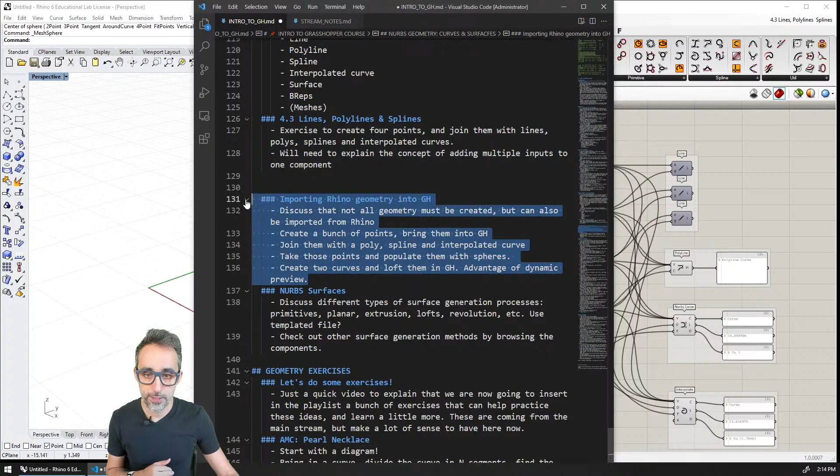So I think what could be super interesting today now is to discuss what we have on the back burner. So how to import Rhino geometry into Grasshopper. So that could be super interesting. And then how to do surfaces. I think I have a file somewhere that I may want to use just to import stuff. And I think that's what we're going to do. Is this what I want to do? Is this what we're doing? Yes.

Okay, so what we're going to do is I'm going to take this file and then I'm going to take each one of the 4 points and I'm going to import them independently. That's going to be one thing.

The other thing we're going to do is we're going to import a list of polylines and a list of points and just place a bunch of spheres on top of them. Create two curves, and then we're also going to take a couple curves and loft them, for example. That could be interesting as well.

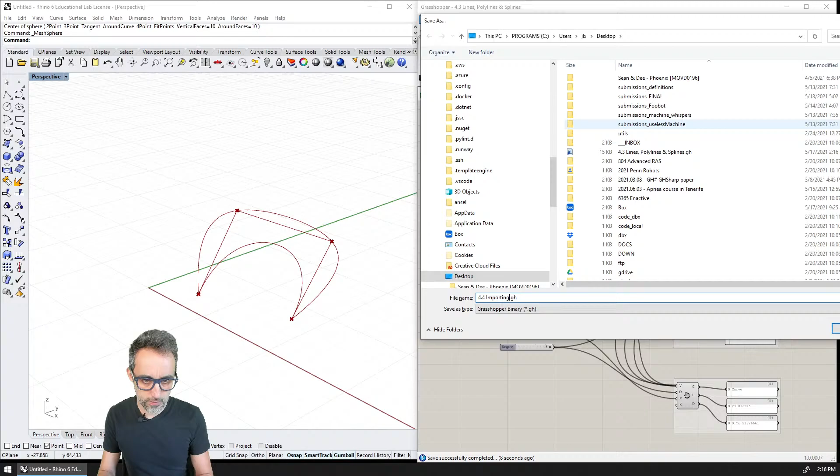Okay. All right, so let's do this. Am I ready for this? Also, I think my batteries are, you know what? I'm going to change the batteries right now because I hate it when I'm half through the stream and then the batteries die and then I have to repeat the thing and it's just not great. So I'm just going to. Can you hear me? Yes. Yoo-hoo. All right.

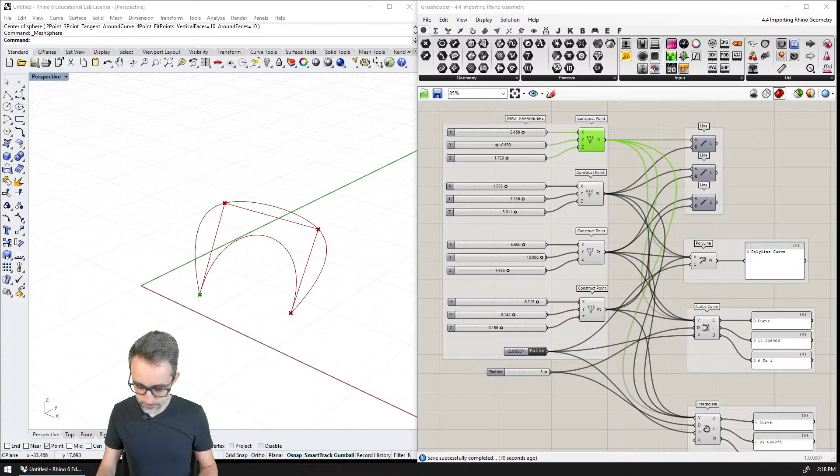Okay, so let's do this. So that's going to be 4.4. Going to be 4.5. Okay. All right.

Hi, this is Jose Luis and welcome to a new video on this series on Introduction to Parametric Modeling, where I'm going to teach you how to import geometry from the 3D modeling environment into the parametric modeling environment so that we can work with geometry as a source of information. But let me frame this, why is this important in the first place?

So in the example that we did on the previous video, we saw how we could create, for example, 4 fully parametric points in 3-dimensional space by controlling the x, y, z of each one of those points, and then create polylines, create NURBS curves or interpolated curves between those 4 points in a full parametric way, right? However, turns out that sometimes working with pure parametric information that has been generated numerically is not very convenient.

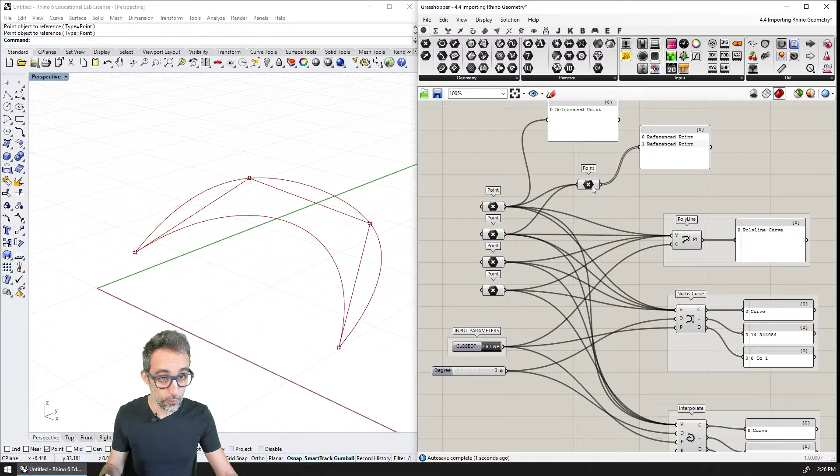So instead of manually loading, I connect this one here and I have the first point. I add the second one with shift. Now I have 2 points coming out of this component. Now I'm going to add the third one with shift. I have 3 points, and the fourth one with shift, and I have 4 points. This component is now storing a collection, 4 points inside of it. And you can notice how the continuous single line wire has changed to a double line, meaning that instead of 1 unit of data, now we have a list of data passing through this wire.

And with 4 points here, now it's much easier: I can connect this to the polyline, to the NURBS curve, and to the interpolated curve, and things are a little easier to handle. So from 4 points, I have connected to one list, and then that list is the list that I plug into my inputs for the geometry. That could be another way to go.

A third way to go could be, well, if I know that these 4 points are always going to be the same and in that order, I can just skip all of that, drop an empty box, right click and set multiple points. And then I can click in order, and the order here is very important: first one, the second one, the third one, and the fourth one. This blue line is a pre-visualization of the order.

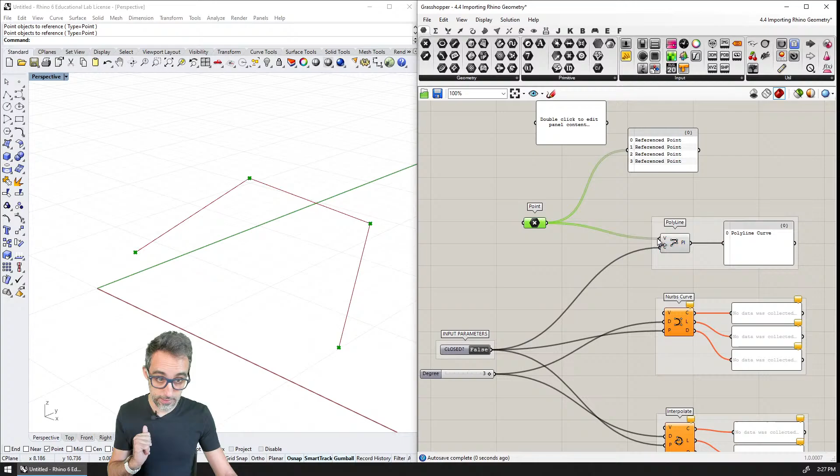And as I right click, then the 4 points are now stored in this container, and I can plug them in here, plug them in here, plug them in here. So now I have a component that contains a list of 4 reference points that are coming in from Rhino. And again, the beauty of this is that these 4 points still exist in Rhino, but they are linked dynamically to Grasshopper.

So if I modify any of the points in Rhino, that point will be modified here on the list, and then those changes will broadcast to how I generate the curves inside of Grasshopper. Okay, so this is a really good way if you want to create a modeling environment that allows you some hand manipulation, but at the same time has all this parametric logic in the back end, or if you just have to work with data that somebody has given you on a CAD file.

All right, so let's take a look at other examples of things that we can do by bringing in data as inputs into a Grasshopper definition. Oops, let me save this file. It's going to be 4.4. Okay, and then I'm going to move here.

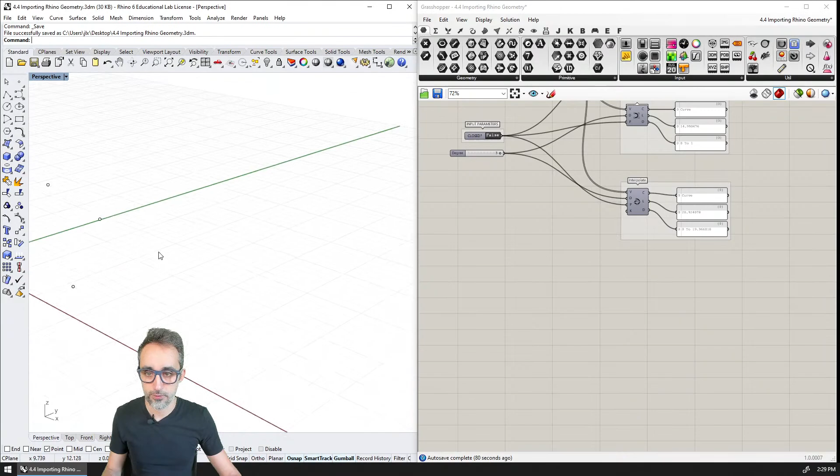Hey Josh, how you doing?

All right, so I'm going to create a bunch of points here. I have turned off pre-visualization here, and I have moved away a little bit from where I was, and I'm just going to create a bunch of points, like a few of them. So for example, several, I don't know, 10 of them.

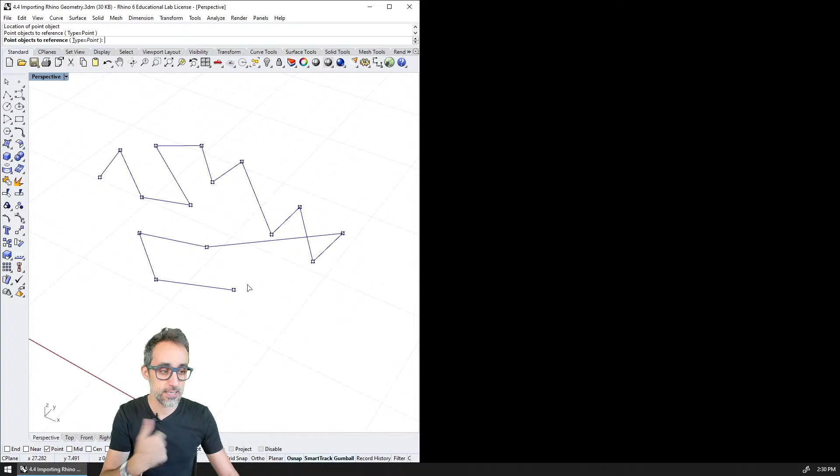I'm just clicking right click and left click, and I create a bunch of them, and then I can create an empty point component parameter, right click, set multiple points, and just select all of these. What you can see is due to the nature of how I have selected them, they turn out to be ordered in this sequence inside of Grasshopper. But now I have here a list of 16 different points. Now with this, I can do whatever I want.

I can, for example, create a polyline between them, and then it creates that object there. I can create a NURBS curve from all of these points, and then it creates this kind of fun squiggly line between them. That's kind of cool, right? I like this, actually. Or I can create an interpolated curve.

This is a very common operation because very often we want to go through the points. So I'm going to create an interpolated curve. I'm going to turn off the other one and this other one. And you can see we also get a fun kind of interpolated curve. And again, if I modify any of the input points, everything adapts accordingly.

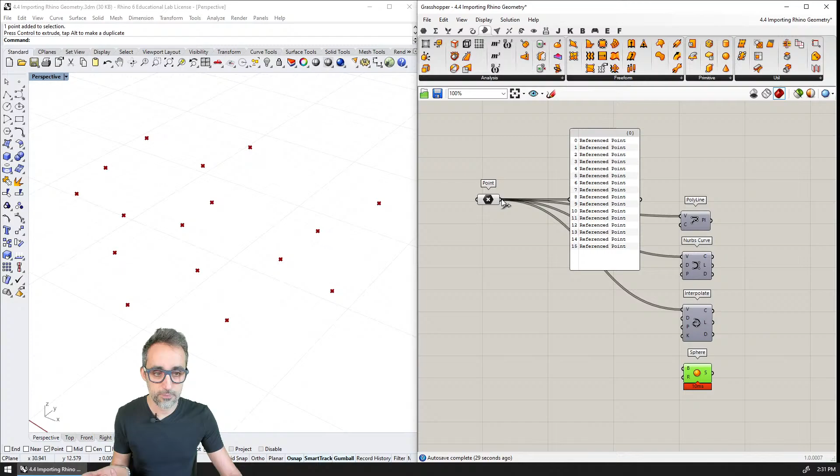Or something that I can also do is use these points as centers for primitive surfaces. So for example, if I go to surface, primitives, sphere, and I place a sphere here, if I plug the point into the center of the sphere, you can see that each one of the spheres is now centered around each one of the points.

Because the sphere, when it's given a list of data, just applies the same operation to all the elements on that list. Further down in this list of tutorials, I will teach you how Grasshopper works with data and how we can manipulate streams of data. So that's

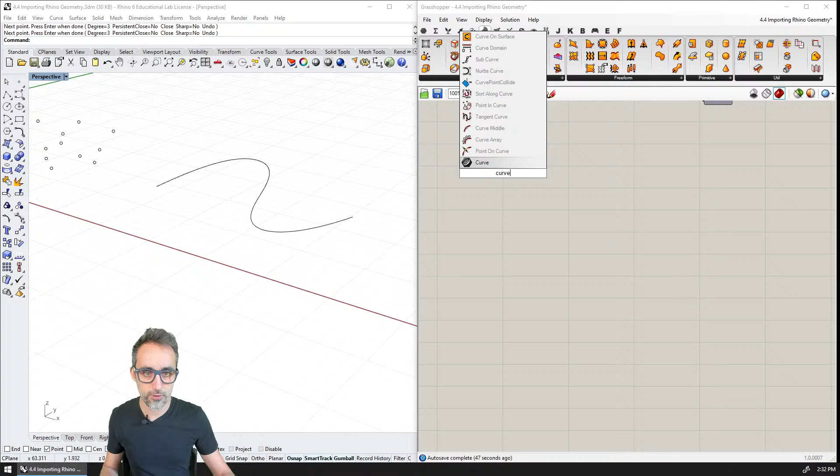another point. Or, if we are tired of points and want to do something different, we can use curves as inputs. So for example, I'm going to create this curve right here. And then I'm going to move over here, double click and type curve, which, because of the hexagon icon, is an empty parameter component that can contain curves.

If I right click here, set one curve and click it, now this curve has been referenced in my Grasshopper definition. I have a referenced planar curve. And I can create another one here, which I can move a little bit in the Z direction. I'm going to bring that one in as well: curve, right click, set one curve. So now that I have these two curves, I can, for example, generate a surface that is a loft between these two curves.

So for example, I can go to Surfaces, Freeform, and I can find a Loft component. This creates a lofted surface through a set of section curves, of curve components.

So for example, now I can plug my first one here, and then if I plug the second one with the shift so that it adds in both, you can see that I have a surface that is lofted between the two curves. And if I now change any of the curves, for example if I move it, the surface adapts. Or if I change any of the control points, for example drag that around, the surface adapts to those changes. You see?

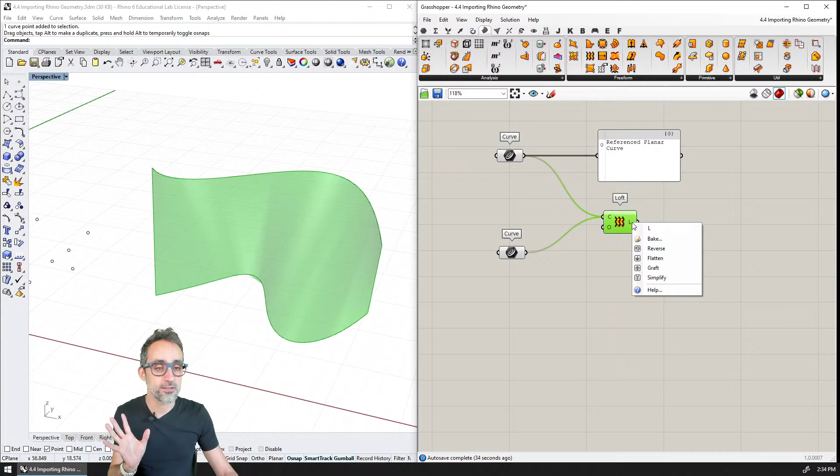And as soon as I get, by playing around with the two curves, the exact right surface that I like, with the smooth surface, whatever, I can just right click, bake the object, and then I will have a copy, a static copy of that surface that I can now send to other programs for rendering, for 3D printing, or whatever.

And remember, as per our previous videos, if I still choose the curve and I move it around, the curve has lost the relation, the surface has lost the relation, the one in Grasshopper has lost the relation to the one in Rhino, because the Rhino one is just an imprint, it's like a footprint, a stamp of when that surface was baked. Okay?

Wonderful. So this is bringing data into Grasshopper as an input. We will do that a lot in the examples that we're going to see very soon. At this point, I think we know enough so that we can work on a few examples just to practice things out.

See you on the next video where we're going to do some practice exercises to get stronger on everything that we have learned so far.

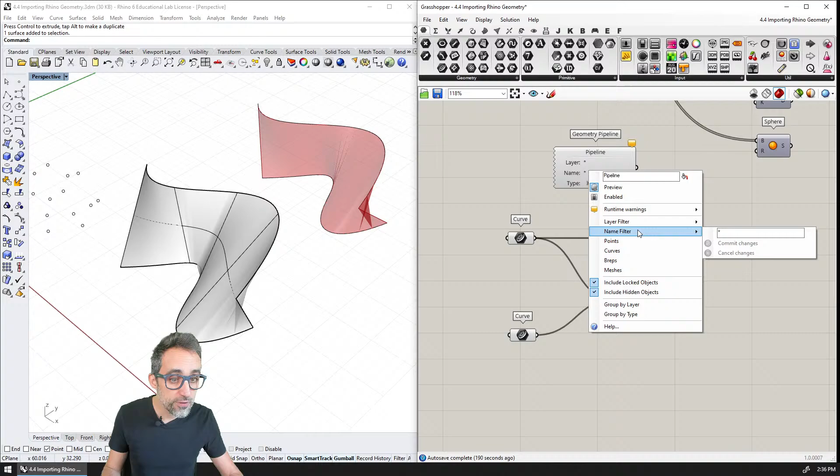So what is, oh, Pipeline, I barely use that component. What is Pipeline? Geometry Pipeline. Oh, I have never used that. Defines a geometry pipeline, Rhino name, layer filter, name filter, include hidden objects. Okay, all right, this is cool. I've actually never used that component, I think. No.

Where are we going now? Okay, ooh, all right, so I actually already did some examples. Oh look, we're live! Yoo-hoo! Okay, so we did some examples, playlists, algorithmic modeling challenges. Yes, we did the pearl necklace.

So actually, my idea was to insert the algorithmic modeling examples, but I wonder if we should just do... I wonder if... So my idea was, we have the playlist, and I'm open to suggestions here. I think we have a playlist. The playlist is... So in the playlist we have blah blah blah, and we're learning blah blah, and I just wanted to insert here as exercises. I wanted to insert the algorithmic modeling challenges, and I wanted to create... So I wanted to have... Yeah, I don't think that's gonna work because these are a little...

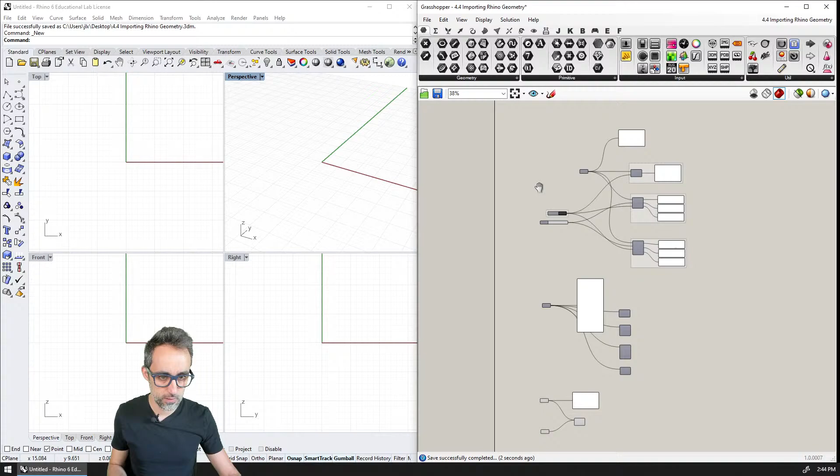Yeah, let's do that. So I'm just going to save this. I'm going to create a new one. And then I'm going to save this with that component and close it up.

All right, we don't need to show an image of that. People can understand that, I don't think we need to show an image of that.

And then for this one, am I going to start the exercises by the end? So am I going to start by showing the end of what we're doing, or am I going to start... wow, this is more difficult than I thought.

Okay, so I'm going to record a quick video, a computational design live stream. I may want to do one that, did I do one that was a backdrop for intro to parametric modeling? Do I have that? Oh my God. Sorry, I should have prepared this a little better. Oh yeah, I do have one, that is Introduction to Parametric Modeling. Okay, no? Hi, yes, okay, so I'm going to use that backdrop then.

Here, welcome to learn, blah blah blah. And then I'm going to just here. Oh God. Okay, no, that's not the one. Okay, so I'm just going to, okay, and then another one. This is going to be what? Image. Nope. And then I'm going to name it. Okay. So, okay.

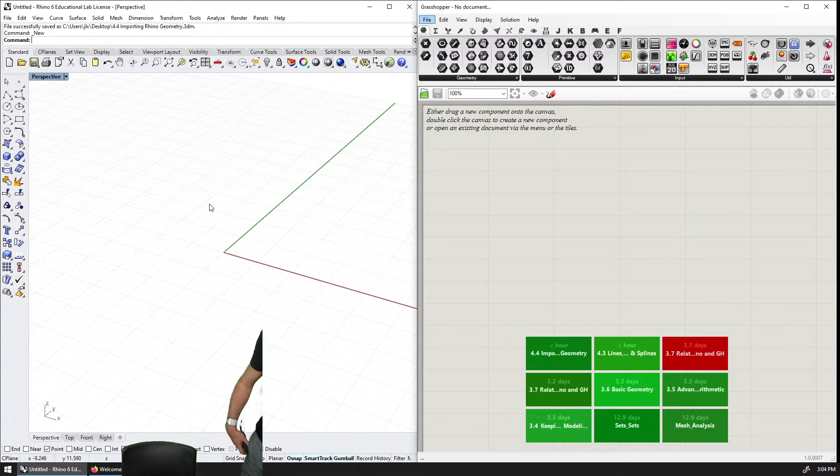So let's go back here. And the sun is starting to hit. Wait, let me close the window. Let me close the window, and then I'm actually going to open the other one, because it's kind of warm in here. All right. How's the lighting? You can still see me, correct? What if I turn this on? No, I don't like that. This is a bit more natural. All right.

Back in Grasshopper, this is going to be a piece of cake. So you'll see, first of all, we want to have the curve, the curve that is going to be the thread. We could generate that parametrically.

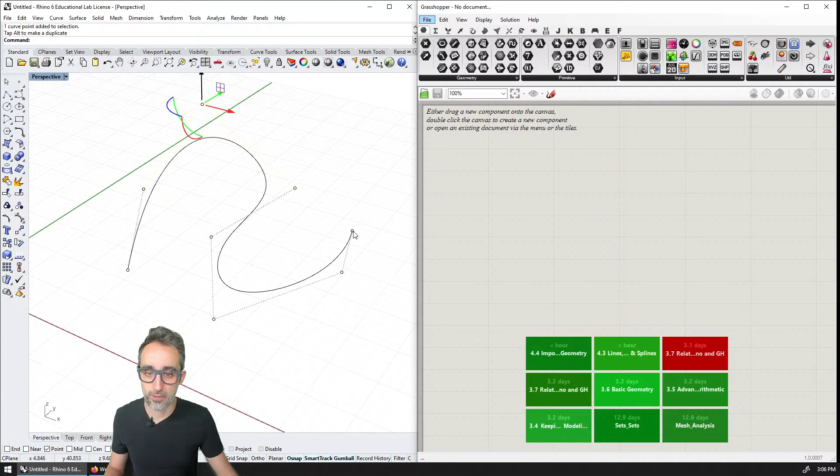But as I said in previous videos, for some things it's actually much nicer to have the tangibility, to be able to touch and move things around in Rhino, rather than moving sliders. So I'm actually going to just draw a curve here in Rhino. This is going to be the curve I'll use as an input for my definition, and I'm going to make it 3D, giving it some volume here and here, so it's not entirely planar.

I have the one curve, okay, so that's one of my inputs. The other input is going to be the number of pearls. For that, I'm just going to use a slider that I'll right click and edit. I'm going to make sure it's an integer, because I don't want 2.3 pearls—that doesn't really make sense, so no decimal part. The minimum is going to be 2, because I don't want less than 2 pearls, and the maximum can be whatever, 1,000. It doesn't really matter, okay?

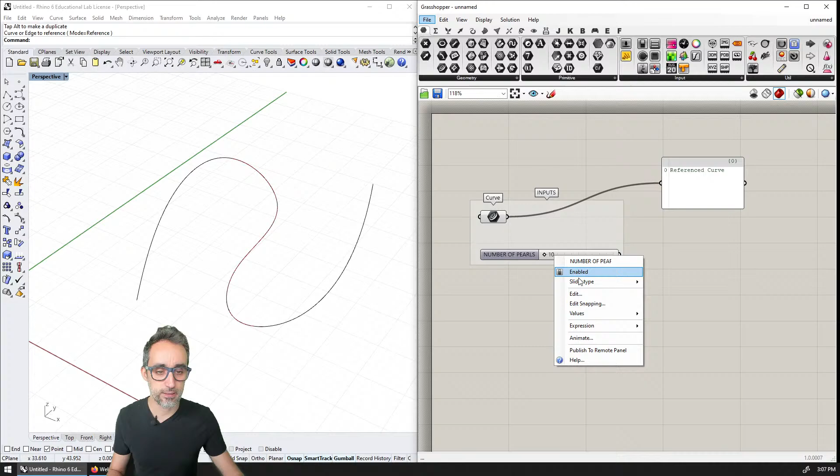And then I'm just going to crank this up, for example, to the value of 10. So this is going to be the number of pearls, for example. And you know how I like to have all my inputs grouped here on the left hand side. This is called inputs. Okay, and then have everything cleared. I'm going to just keep 100 here so that it's a bit easier to move this around. Okay, wonderful. So what is the next thing that I need to do?

First, as I showed in my diagram, I need to subdivide my curve in an amount of points which is equal to how many pearls I have. So in order to do that, how do I subdivide a curve? Well, this is something you're going to have to start doing on your own, which is going through the library of components, reading through components and finding the ones that might help you do certain operations. So if I want to subdivide a curve into points, I wonder if components to do this would be either in the curves family or in the points family.

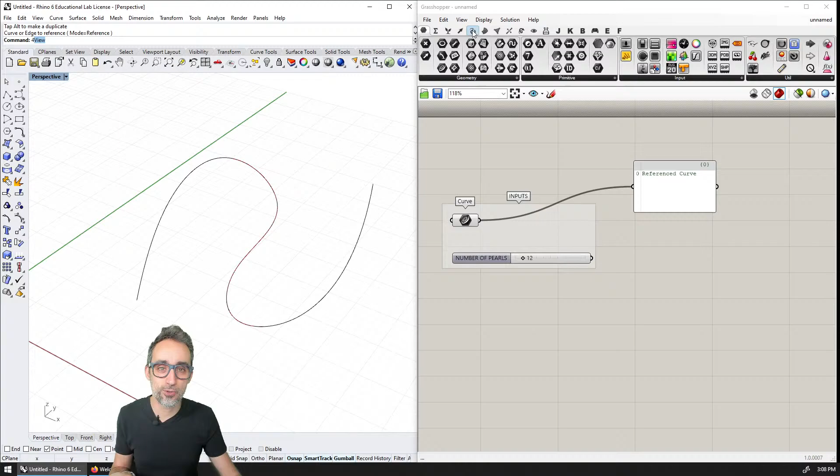I probably want to go to the curves family, and you can see that there's a whole category called divisions here that gives you many options to do different divisions for curves. And if I say divide curve into equal length segments, I think this is one that is probably going to give us good results. As usual, the first thing that we do whenever we drop a new component that we have never seen before is take a look at the inputs and the outputs.

The input is the curve that I want to divide, how many segments I'm going to be dividing in, and whether I want to split at the kinks or not. I'm not sure what that means, but I can still try it. And then this is going to be the division points. This is going to be the tangent vectors at the division points, which I don't think I'm going to be using, but it's okay to have. And T is going to be the parameter values at the division points.

Remember when we spoke about NURBS geometry, we spoke about the parameter being that relative position that we can situate ourselves along curves inside of the domain of the curve. So T is going to be that value for each one of these points. So I'm just going to plug in here the curve, and I'm going to plug in here the number of pearls. Actually, if you read carefully, it says here the number of segments that I want to divide, and here I am saying the number of pearls.

So if I actually crank this down to 2 segments, you see that I actually get 3 points. It's not exact, okay? It's not perfect. So this should be more like number of segments, but it just doesn't really make sense. So we could actually say, well, maybe to be more precise, if I want 3 pearls, what I need is to divide in 2 segments. So what I will need to do, and I'm going to use an expression here, is take whatever you give me minus 1.

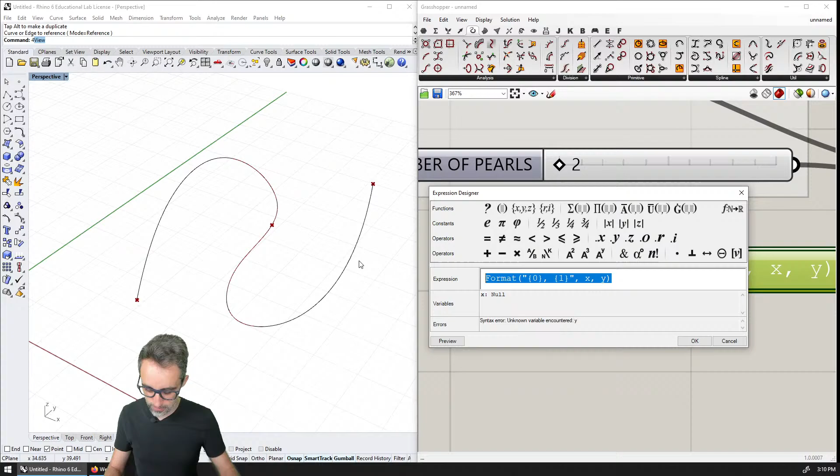Remember that I just happen to like expressions better for computation, you see? And now this is going to be much, much cleaner. Remember to always read the expression carefully. This is number of segments, not the number of pearls. So now I have number of pearls is going to be 10, and now I have exactly 10 pearls here.

And then the only thing that I need to do now is place on top of these spheres, which I can find under surfaces, primitives, spheres. I can place spheres on the points, and let me see the points here. Yes, so all the points from the divide curve, you can see that I have a collection of 10 points, which are also the ones that I can see if I click here, I can see the 10 points.

If I use those 10 points as the centers for the spheres, you can see that now I have the pearls, right? And I can increase more or less, and I can have more or less pearls on my necklace, which is kind of nice, right? However, the problem is that the radius for these pearls is always 1, because that's the default in the component.

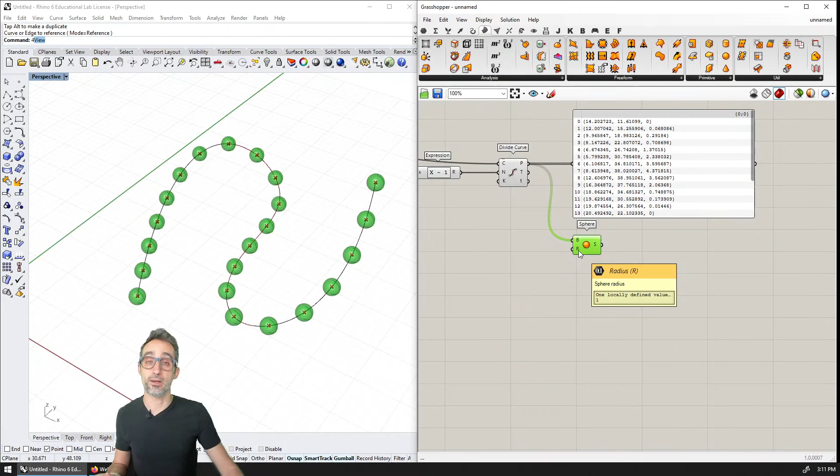So, as we saw before on our diagram, it turns out that in order to make this happen correctly, what we need to do is calculate the diameter of each one of the pearls dynamically. We need to calculate it parametrically using data in our definition. So how do we do that? So I'm going to create another expression. You know how I like expressions better than normal operators. And what we're going to do here is I'm going to say n is going to be the number of pearls.

So if I now create an expression component, let me do that again. I'm going to create an expression component, and this is going to be the length of the curve, and this is going to be the number of pearls. All right? So now the diameter is going to be L divided by N. And I need to plug in here the number of pearls, so that's going to be N.

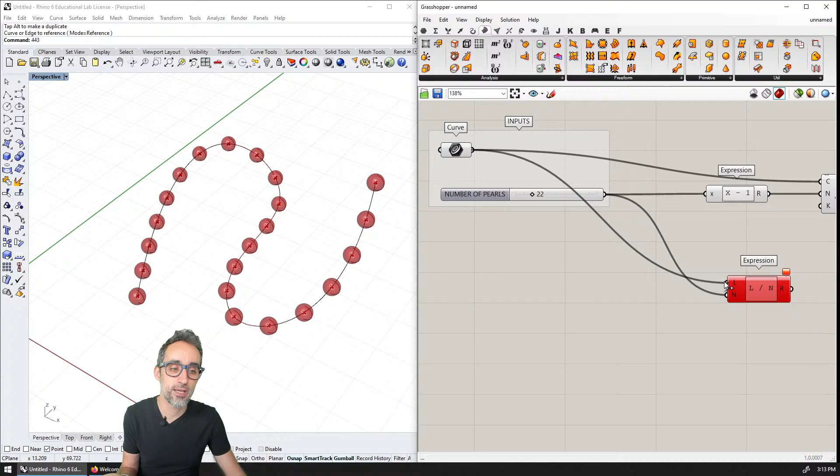And you might feel inclined to connect the curve here. But that is not going to work, right? Because you cannot plug a curve into L, which is expecting a number to work with. The expression component cannot automatically decide that if you give it a curve, what you're actually meaning is the length of that curve. So what you need to do first is, using some kind of calculation, figure out the length of that curve. Thankfully, Grasshopper gives us components that can do that very easily.

So for example, if I go to curve, you can see there is a full tab called analysis that can give us a lot of information about curves in general. One of them here is the length of a curve. So it literally takes a curve and it measures the length. If I place that here, the input is the curve you want to measure, and L is the length of that curve as a number. So I can just plug that in here.

Let me use a panel to make sure that this is working well. Yes, the length is 89 units of whatever. And then here, I'm just going to place that under L. Now, it turns out that each one of these is 4 units in diameter. So if I plug this in here, you can see that now we're getting close, but not quite. What is going on? If I go to the top view, you can see that most of the spheres are actually overlapping with the center of the other spheres.

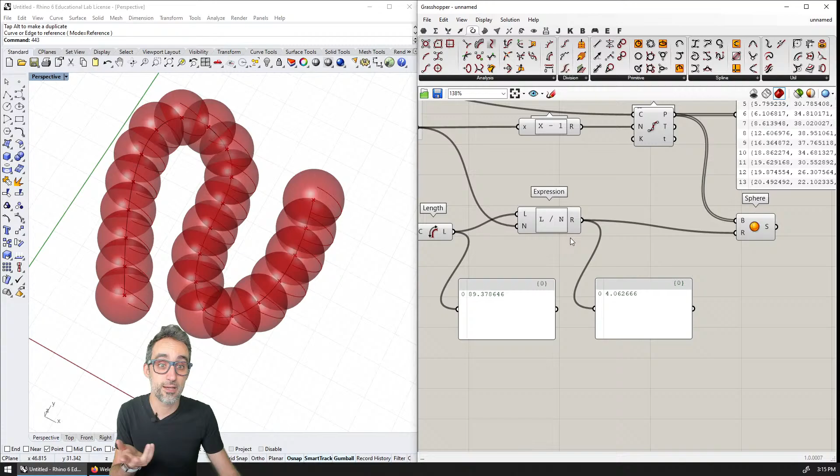You see that? That is because what I have calculated here is the diameter, but what the sphere component is asking me for is the radius. So it's very important, as I said before, to always read the inputs carefully so that we know what to do. So how can we calculate the radius then? Well, the radius is just half the diameter, right? So I can change the expression and say I want to divide length by 2 times N, or whatever the result of this was, I just multiply it by 0.5. Both of them work well, okay?

And if I do that, now you can see that the pearls are fitting well with each other. And look at this, this is the nicest thing. If I increase the number, you can see how the diameter is slowly decreasing because they're parametrically related, and everything adjusts accordingly. And if I move one of the points of the curve and stretch the curve a lot, you see how all the pearls just increase in size to adapt to the new geometry.

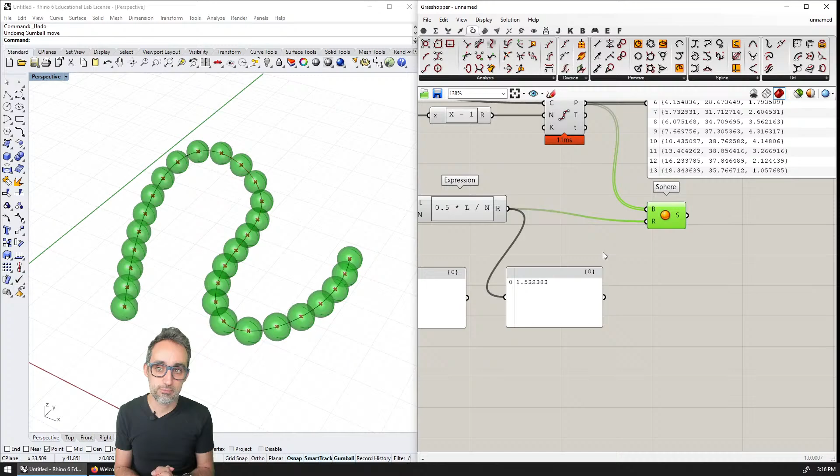Okay? So literally, this is the magic of parametric modeling. Just by making sure that we have the right information and that everything is parametrically related to each other, we can create complex relationships of modeling form between different geometry types.

Now, a quick footnote to this exercise. I have taken many shortcuts here, because if you look carefully, you cannot really calculate the diameter of the pearls just by subdividing the length. Sometimes you're going to get this situation where the curvature is very pronounced and the pearls are overlapping, whereas when it's not, you're going to have a gap between them. And similarly here, you have some overlaps, and here you have some gaps. This is because the process that we have followed does not really take into consideration perfect tangency, okay?

And that in order to do that, we would have to use other components here, like for example, divide distance, and follow a different logic. So this was just for the sake of oversimplifying the process. But if you actually want to see how this works, we have an algorithmic modeling challenge on pearl necklaces, which is somewhere here. This one. If you're actually interested in that, make sure you check our algorithmic modeling challenge 3.1, 3.2, where we improve that and we make things perfectly tangent.

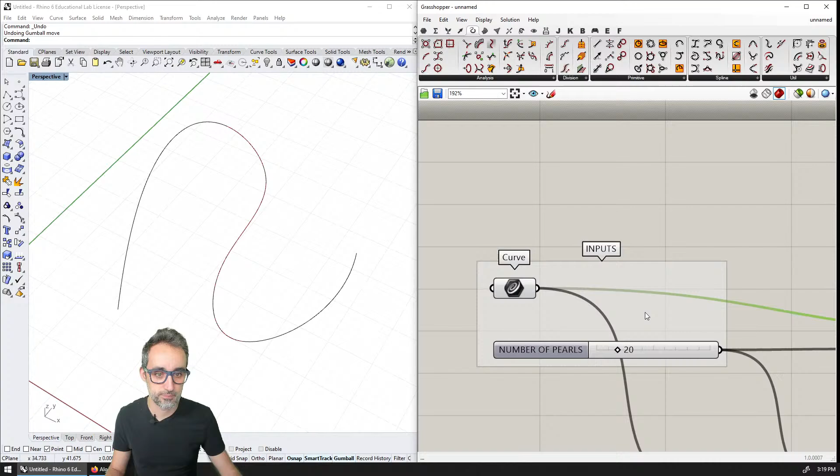All right. I need to record the introduction. And this is going to be exercise 1, pearl necklace. Okay. And it's going to be E1, yes.

Hello, this is Jose Luis, and welcome to this new video where I'm going to teach you how to model a parametric. Starting over again.

Hi, this is Jose Luis, and welcome to this new video where I'm going to teach you how to model a parametric pearl necklace. And what does that mean? It means that starting off from the shape of some curve and then adding as one of the parameters the amount of pearls in a necklace, we're going to create a definition that is going to generate and populate an amount of pearls equal to whatever number we choose parametrically on top of that geometry.

This could be used for visualization, it could be used for jewelry design, it could be used for many things. But the idea is that we're going to learn how to model geometry that is bound numerically to each other based on the relationships of the elements in this modeling environment.

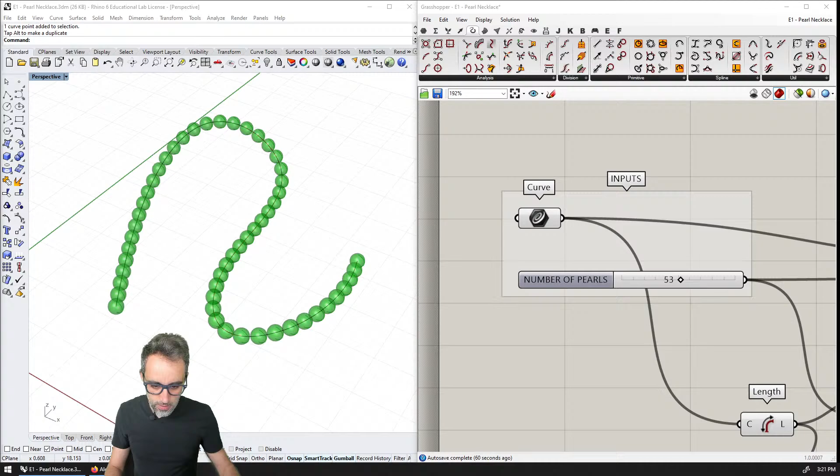All right. Okay, so we're done with this one. Woohoo! All right, we're going to save that. I'm going to save this without that. And we can probably keep that. And I'm just going to group this here. And there you go.

All right, what is the next thing we are going to do? We're going to model a drinking glass. So, yes, so as we had it here, third point. Okay. To the coordinates.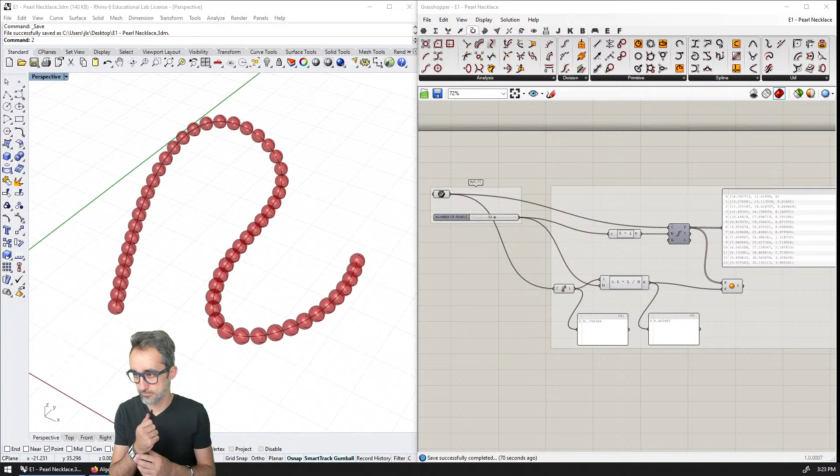Okay, we're going to look at a drinking glass. Yes. Okie dokie. So we're going to start a new exercise. And then here. Okay, so the second one is going to be a drinking glass. And then here we're going to save this. And then we're going to start a new one. Okay. Where is my pen? What am I going to draw here? So I'm going to start by doing the drinking glass.

Let's get busy. So as I said before in my previous video, the best way to start any parametric modeling exercise or work is to break down the problem into the steps that we think we're going to pursue in order to complete the exercise, and also think about what are the inputs that we're going to be using and what is the relationship between them.

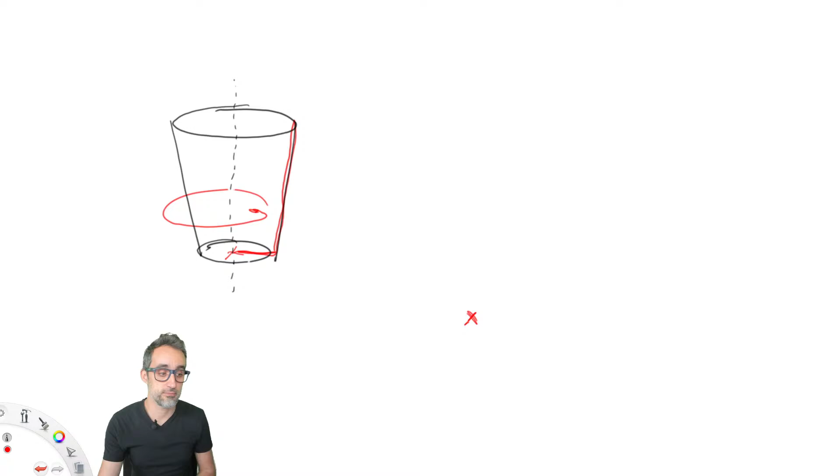Then something that I will want to also have control over might be the radius of the base. So I may want to have control of this distance, and therefore there might be another point here, and this is going to be the radius of the base. I'm going to call this capital R, the radius. And then this could have some kind of other point here, a third point, all right? And then this point could be the point that closes the polyline that becomes the curve that I want to revolve. And then there would be an axis here that I would do the revolution over.

My question here would be, what parameters am I going to use to control where this point is in 3D space? You could argue, well, maybe I can use this radius here. But I would argue that perhaps that is not very intuitive, because if I have, let's say, one slider for the radius on the bottom and another slider for the radius on the top, then maybe what would happen is that as I increase this radius, I would start getting a shape something like this, which would basically kind of break the inclination that I have already achieved in my glass. So from a design perspective, I don't think I would want to do that.

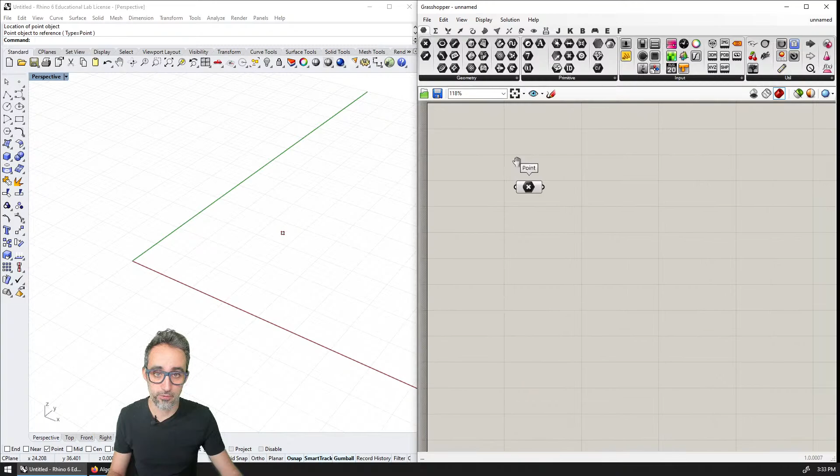So I'm going to add a new parameter that is going to be a slider, and I'm going to call this capital R. And remember, as per our diagram, that's going to be the radius of the base of the glass. So this is going to be a slider that is going to go from 0 to, for example, 10 units. And I'm going to set this at the value of 1 right now. So that's going to be one parameter.

Then the next parameter that I'm going to throw in is going to be another slider. And that slider is going to be lowercase b, which is going to be the horizontal offset from this point to this point, how far they are away horizontally. Okay, the way I'm going to do that is I'm just going to right click here and say b, and then I'm going to edit this, and I'm going to say, well, this is going to be from -5

because it could go inwards. Maybe we want to design a glass that can bend inwards, but if we don't, we can actually cap that possibility by just saying that the minimum of this slider is going to be 0. And then the maximum is going to be +5, for example. And I'm going to leave it at the value of 0.25. That's good with me. And then I'm going to just copy paste this one and say that this slider now is going to be h, the height of the glass, from 0 to 10, just like the previous slider.

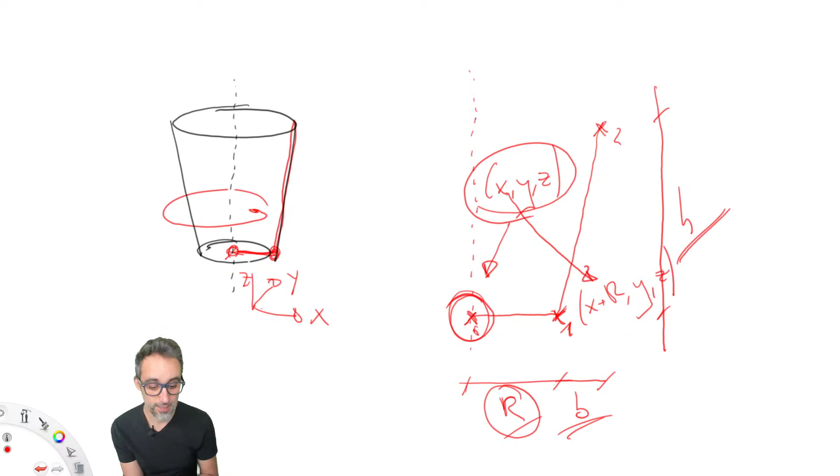So in order to find point number 1, the only thing that I need to do is figure out these coordinates and create a new point where the X coordinate has the radius added to it. So let's just do that. So I have the point that has been referenced here, and I can't really read the coordinates here, but it has whatever X, Y, Z coordinates. How can I read those coordinates, the X, Y, Z, and then add some number R to the X?

Well, it's actually quite easy. So if I go to the vector tab, and if I go to point, you can see that we have used the construct point.

Given 3 numbers, I can create a point object. But there's also the exact inverse component: given a point, give me the 3 numbers that define its coordinates. So I'm going to place this deconstruct, take a point here, and now I can see the X value, the Y value, and the Z value.

So point number 1 is just going to be as easy as adding to the X coordinate the radius. I'm going to create a new point whose X coordinate is the X coordinate of the previous one plus the radius, the Y coordinate is going to be the same, and the Z coordinate is going to be the same. You see what's happening here? Now, no matter where I move the original point, the second point follows parametrically. If I increase the radius, you can see the other point is always bound. So this is going to be point 1.

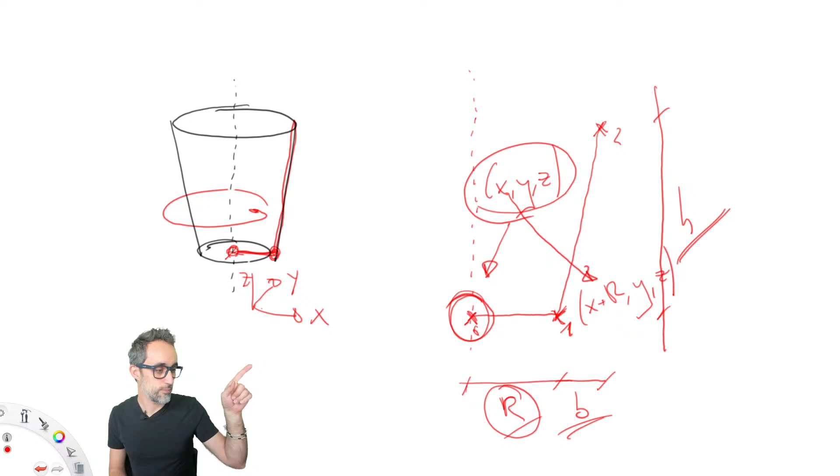Now the thing I need to do is find point number 2, the one on top. If I think about it, the X coordinate of this point is going to be whatever the X coordinate of point number 1 is, plus B, because it's whatever these coordinates are plus this distance. The Y coordinate is going to be the same as Y1, because remember, there's no depth here, it's not going anywhere deep. But the Z coordinate is going to be whatever the Z coordinate of point 1 was plus the height, this value here.

So the only thing we need to do now is break down those relationships, take the coordinates of point 1, and use those to generate point number 2. I have point 1 here, so I could deconstruct this point again into X, Y, Z and operate with it, or I could, to be more optimal, just fetch them directly from here, since I know this is the coordinate of X1, and these are the coordinates of Y1 and Z1. But for the sake of visuals, I'm just going to do this — it's not the most optimal, I'm doing extra operations, but it's fine.

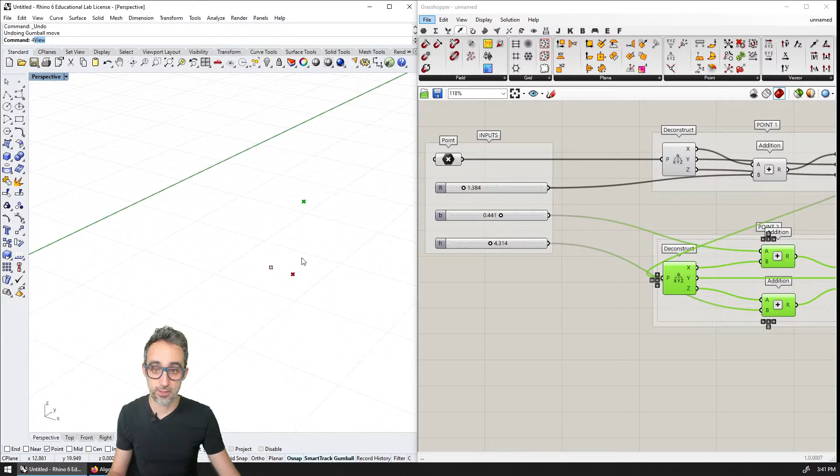I can increase the radius a lot, and you can see how the whole wall moves accordingly. I can do negative and positive, and I can increase the height a lot too. Let's make this a little bigger — this is going to be the height, and this is going to be the radius. Now I have the three points: first point, second point, and third point.

Can I join those with a polyline? Let's do that. I'm going to type polyline, add the first point, the second point with shift, and the third point with shift. And now I've created the wall for my drinking glass. I'm going to give it a little bit more of an inclination. Okie dokie.

So we have now the wall. Now the only thing that we need to do is create a vertical axis, and we need to revolve this curve around that axis to generate a surface of revolution. How can we do that?

If we go here to the surface tab, and if we go to freeform, you can see that somewhere... Revolution. We can create a surface of revolution. Let's drop this and see what parameters it needs.

I'm going to need a profile curve. I'm going to need a revolution axis, and you can see that the icon tells me that it has to be a line. Then this is asking me the domain of the revolution, so from 0 to 2 pi by default. 2 pi in radians is 360 degrees. Okie dokie, let's take that.

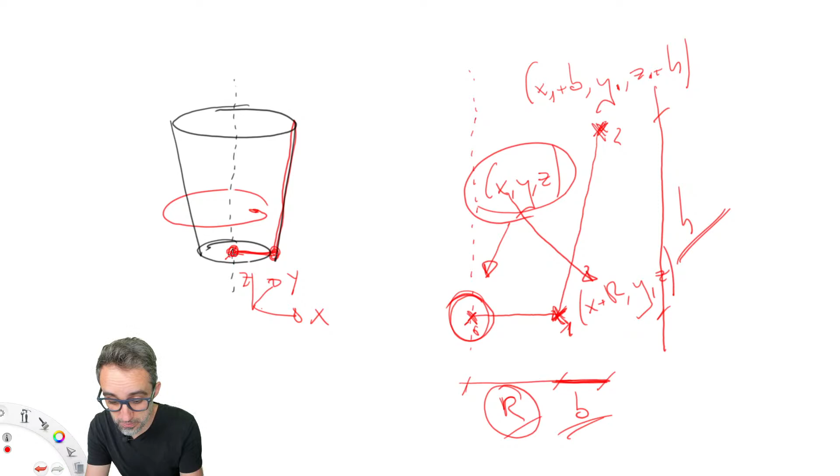Well, I can just generate a line that is going to be this point, and between that point and another point that is any distance on top of it. It doesn't really matter. So what I'm going to do is take this component, take this point, and deconstruct it here to the z-axis, the z-coordinate.

I'm just going to add some random number, so I'm going to create a panel and use 1 as a unit. This is not even going to be a slider, because I don't want the user to think this is something they should adjust. So I'm going to take the original point, deconstruct it into coordinates, and add to the z height 1 unit, then construct another point based on the same x, the same y, but a z coordinate that is a little higher.

And then what I'm going to do is create a line object between the second point I generated and the first point, the original one. So now you can see that I have this line that is a vertical axis, and no matter where I move my point, all the other points are parametrically linked to it, which is kind of nice. So I'm going to use this line as the revolution axis, and ta-da!

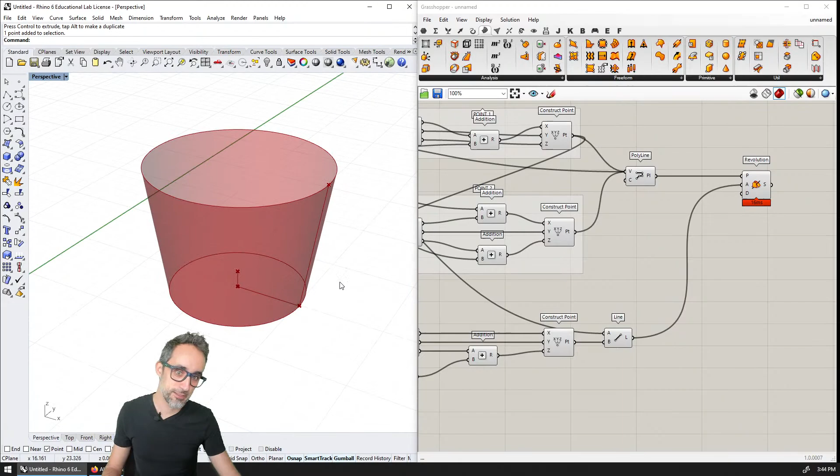Woohoo! What do we have here? Oh my god, it looks like a drinking glass, but I don't like the proportions here. Wait, let me make this a little more and a little more slender. I kind of like this. What about this? This is looking kind of nice. Do I like this? I don't know.

Let me see, I'm going to bake this so that I can see a little better. And I'm going to choose ghosted so that I can see. Let me try another one.

So I'm going to move the point here, bake it, and make a version of this that is going to be a little wider, perhaps a little more ample, and a little thinner. I'm going to bake that one, take a look at it, and then I'm just going to copy another one.

And now maybe this could be a plate instead, if I just make it very, very shallow. Interesting, so it could be a glass, but it could also be a plate. I'm just going to bake this, and boom.

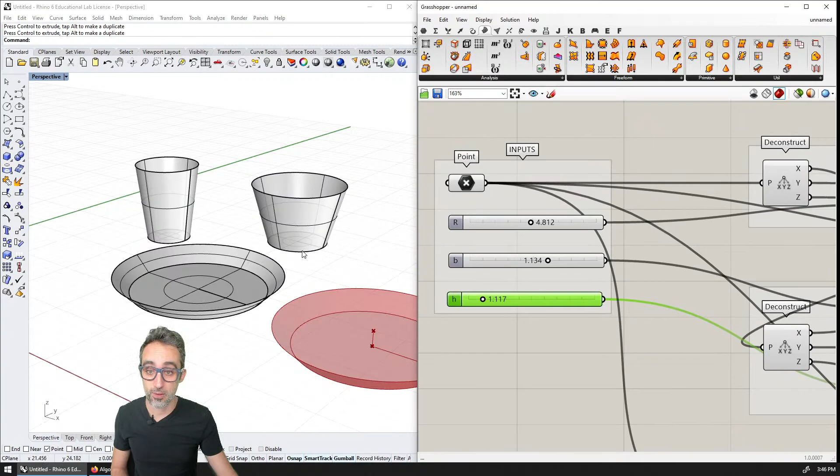And this that you're seeing here is what's very nice about parametric modeling: the idea that by creating the tree of relationships that define a particular family of forms, then by modifying the input parameters, like where the center of the glass is, and some numbers that define its height, width, etc., I can explore the family of possibilities this gives me in a parametric way. So in this exercise, we have seen how to generate something that looks like a drinking glass, or maybe actually even a plate, okay?

And one thing I would like to note is that when I created this point and this line, since it was kind of temporary geometry that I needed just for the process, but wasn't really meaningful in my definition, maybe something I want to do is just hide it.

I'm pressing Ctrl Q to disable the visualization so it doesn't obstruct what I'm seeing in the process. That's something to think of to keep your definition cleaner. You could also choose to just delete everything else, all the points, all the polylines, and keep it super simple. I don't know, up to you.

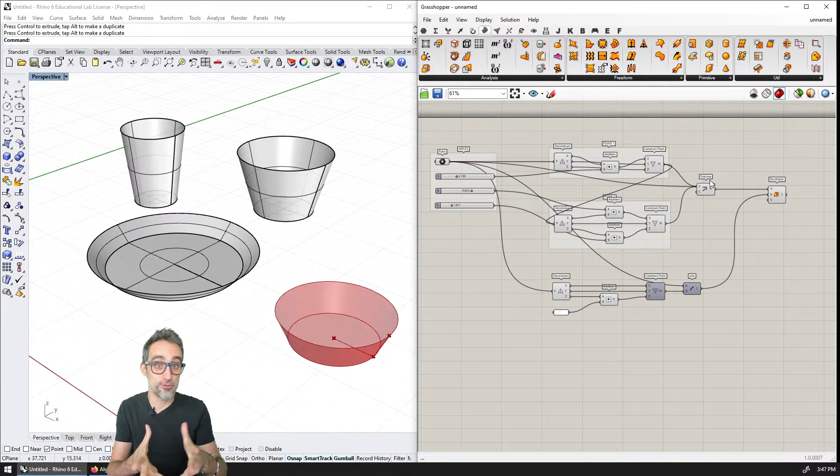That was a good exercise, and now you can use your glass generating algorithmic definition to generate a whole variety of these elements, bake them, render them, 3D print them, or whatever you want. Let's take a look at more exercises.

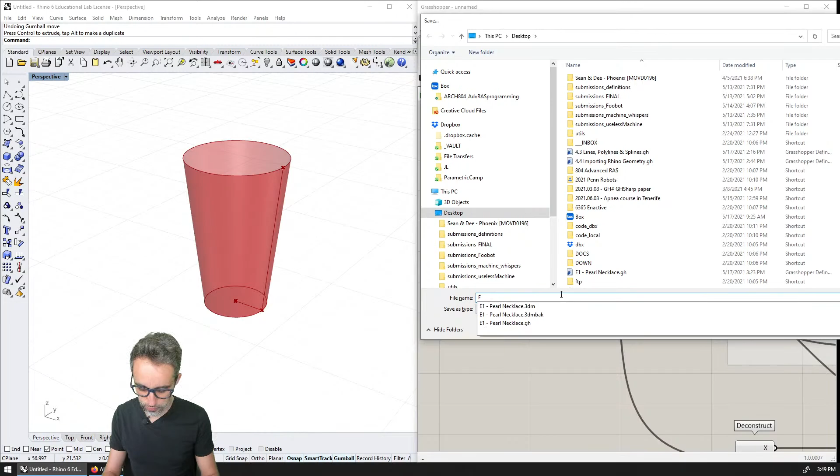And what is it going to be called? Exercise 2, glass.

Hi, this is Jose Luis, and welcome to a new exercise in this series of Introduction to Parametric Modeling, where I'm going to teach you how to model a very simple drinking glass. The beauty of this is that it's fully parametric, so we'll be able to choose, for example, the point where the center is going to be, but also a few other parameters, such as the radius of the base, how tall or short the glass is going to be, and the inclination of this glass.

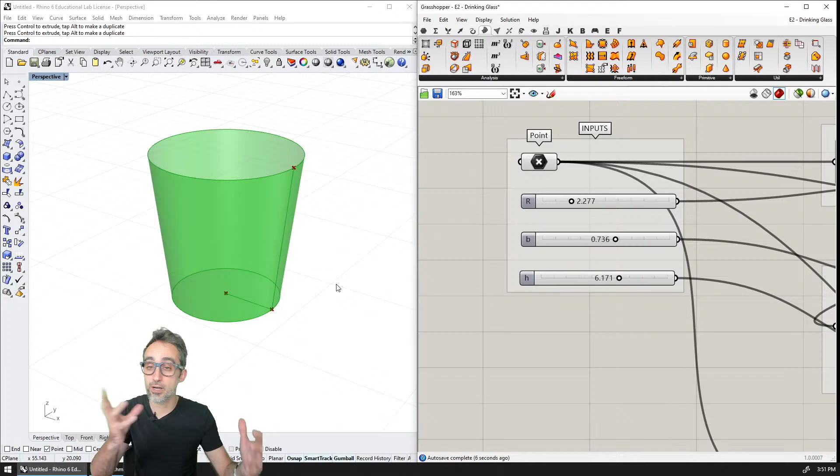By doing this, we'll be able to explore all the variability of different forms so we can generate different versions, bake them, and send them for rendering, for fabrication, for production, whatever you want. This is going to be a super simple exercise. We're going to learn the basics of numerical relationships between point coordinates. It's going to be super interesting. Let's get busy, let's get doing it, let's get hands on.

Okie dokie, all right, so that is great. Then I'm going to group this and say revolution axis, and this is going to be the surface.

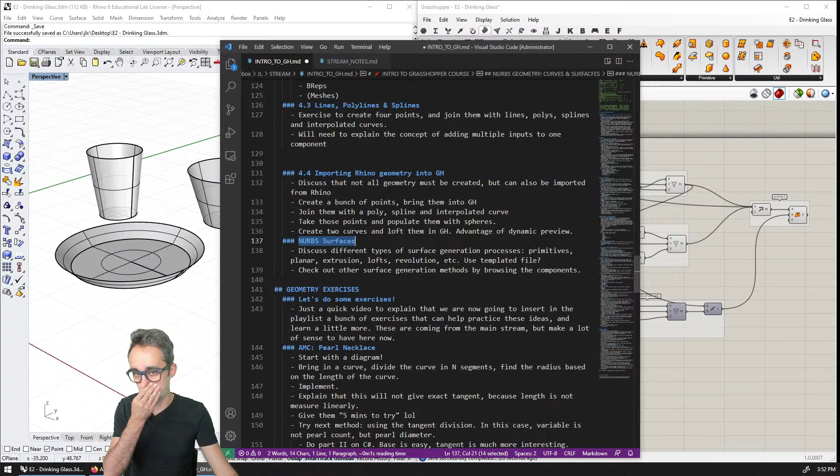Okie dokie, so we have that. Do I need to save this? I probably don't. Well, for the point, I may want to have the point there. Fine, I'll save it. All right, I forgot to record NURBS surfaces, so I need to go back and do this one before we go into flower base, which I think that's where I'm going to stop today.

Yes, because chess pawn, I don't think I'm going to do it since it's similar to the same ones before. But I want to do the chessboard, and attraction and repulsion, and the hanging cloth. So that's going to be nice. Okie dokie, and I need to do that before 5 because I have meetings at 5, 6, and 7.

Oof. Oi, how's everyone holding on? Nylan.

Well, I mean, it's a matter of choices. Again, when it comes to design and parameters, we all have our different opinions, and there's no right or wrong. So it's up to you. It's absolutely up to you.

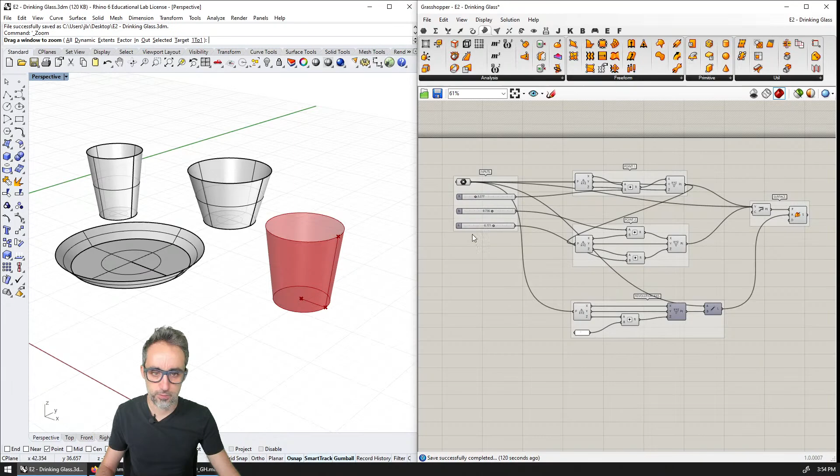Okay. All right, so, okie dokie. Surfaces, let's take a look. So I'm going to save everything beforehand. I'm going to save this, I'm going to close here. I'm going to save this and close. And I'm going to save this and close.

And surfaces, I think for this one I don't want to explain everything, I'm just going to... oops.

Oh, where are... I did have a file somewhere with a bunch of different surfaces. Where did I have this? I don't want to... Sorry, I'm looking through my files, seeing if I can just pull up an example of different surfaces. And I cannot. Where are those files? Where are those files?

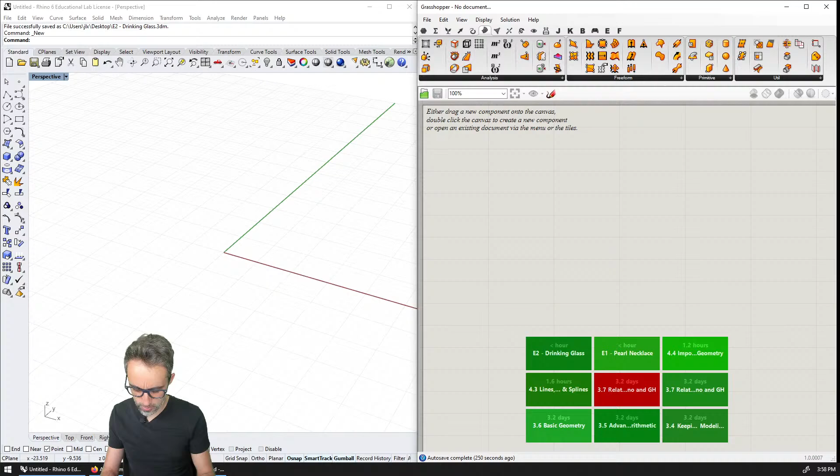Okay. So it's going to be 7. Okay. So that's going to be here. That's going to be what? That's going to be 4.5. NURBS surfaces. And that's going to be this one here. And that's going to be this one.

Okay. Then color. And then, okay, and then ruled surface. And that's going to be here, and that's going to be a set. Okay.

And have I shown how to do surfaces before? Yes, we did it with the lofting on the exercise previously. One way.

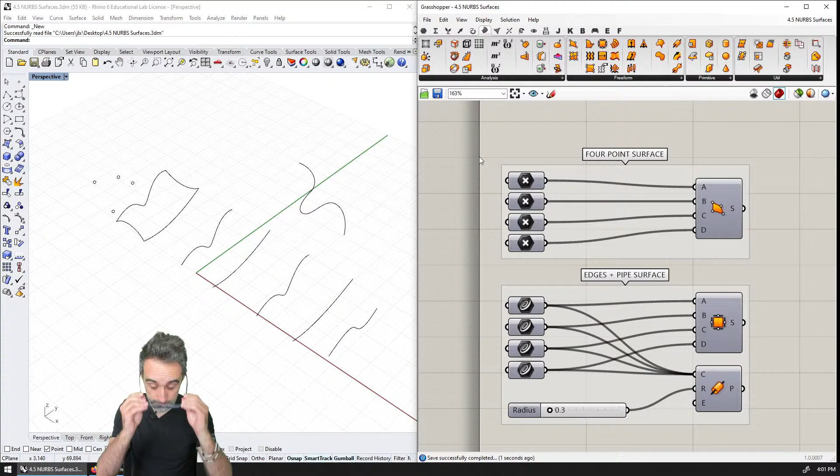Okay, I'm very dense today. I can't talk much more. All right, I'm going to record the tutorials and then I'm just going to call it a day. Is it a day for a run? Should I go out for a run? I think it's really, really nice weather out there. Might be a good day for a long run, actually. Okay.

Hi, this is Jose Luis, and before we go into hands-on trying things out, I also wanted to do a quick round of review on the different ways we have for modeling surfaces in general. And this applies to NURBS surfaces, but it also applies to other kinds of surfaces. The idea is that, as I explained before, NURBS surfaces are driven by control points, but only in very niche cases do we actually generate these surfaces by designing the control points one at a time.

Typically what we do is, in order to generate these surfaces, we start off from other parameters or we use simple curves and we follow other processes to generate this form. So, for example, I'm going to run you by a bunch of these examples. And at this point, what I would like you to think is that you might just want to give it a chance to browse through the library of components that are available in Grasshopper, for example, or in Rhino, and take a look at these components and their descriptions to see if you can actually figure out what they do. Because if you are familiar in general with 3D modeling, you might find that many of these operations are actually quite familiar to you.

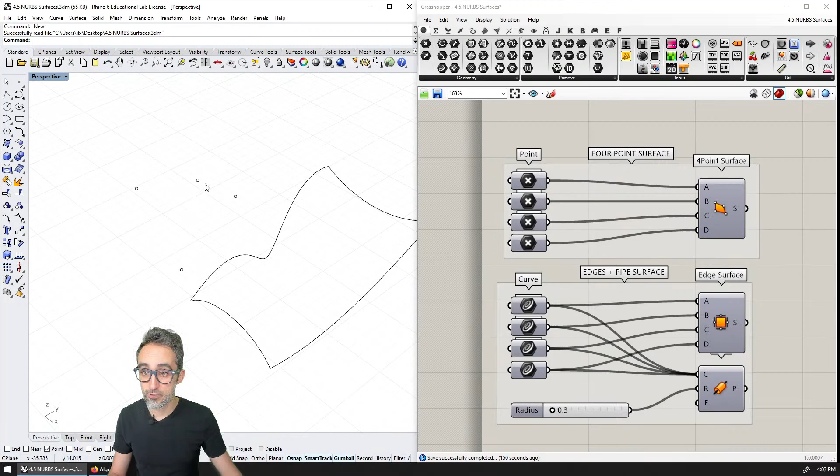So for example, we can create a 4-point surface by inputting the 4 corners of that surface. So if I take these 4 points and I feed them into a 4-point surface, we can see that we get, as a result, this kind of hyperbolic paraboloid kind of situation.

However, if instead I take 4 boundary curves with any particular shape, and then I create an edge surface, what you will see is that Rhino will try to fit a surface to the boundary of the 4 curves that we have defined here. Obviously, it helps a lot if the 4 curves are ordered properly, if their edges match each other, and if the endpoints also match. That is super helpful as well. You can find those here under 4-point surface or under edge surface.

There is also piping. Piping is a very simple surface, which is basically a tube that is extruded along a NURBS curve. So for example, here I have created 4 pipes that are boundaries to that original surface that I have created.

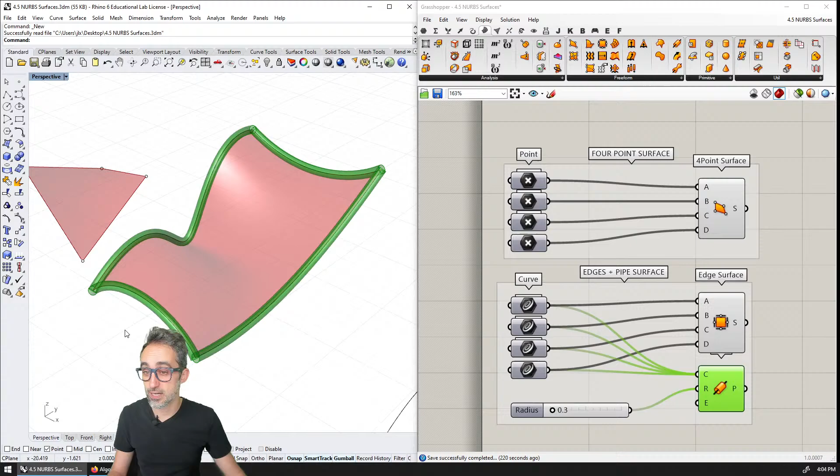So imagine that we had a structure that had pipes on the edges and it had this cloth or this tarp tensioning between them, for example. The fact that I said that is actually not technically right, because a 4-edge surface will probably not have the exact same shape as a tensioned fabric. Okay, so forget what I just said. This was a really bad example.

Now, if I go down here, you can see that, for example, I can have two profile curves and I can do a ruled surface through them. Remember that a ruled surface is the result of moving a line, a straight line, across a particular trajectory. In this case, using the two curves as the rails for the motion of this straight line.

Ruled surfaces are very interesting because, for example, they're really useful when you create them with concrete, and you can create the formwork. The formwork can be created with straight elements, and it's a very nice thing. It makes creating these surfaces much easier in the physical world. But also remember that ruled does not necessarily mean developable. They are two different concepts. Okay. Last, well, it's not last.

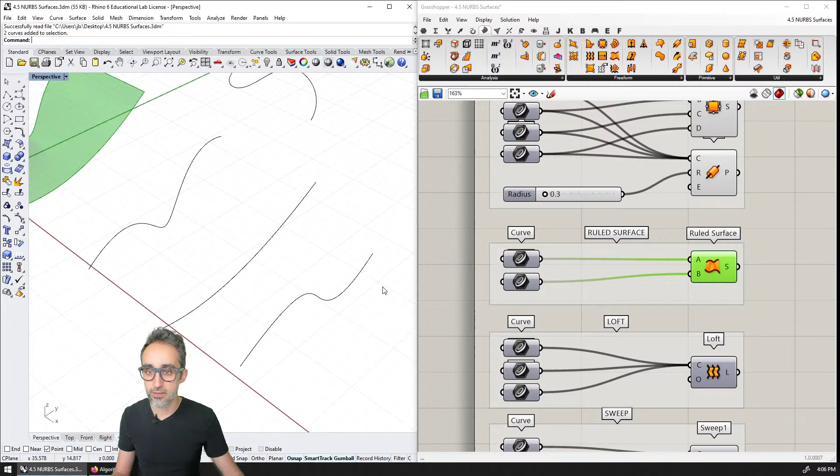I can have, for example, three curves here, and then I can create a loft, which is basically a surface that is fitted through the three curves, so it ensures that the surface is going to pass perfectly through the three curves. You can think of lofting as a surface that is interpolated over a collection of curves. That's one way to think about it.

And then, last but not least, we have sweeping. Sweeping is the operation where you can create a surface by moving one profile curve over another curve as if the other one was the rail on top of which this one is moving. So for example, this one would look something like this. You can see how this profile curve is moving along the rail to generate this undulated surface. Okay.

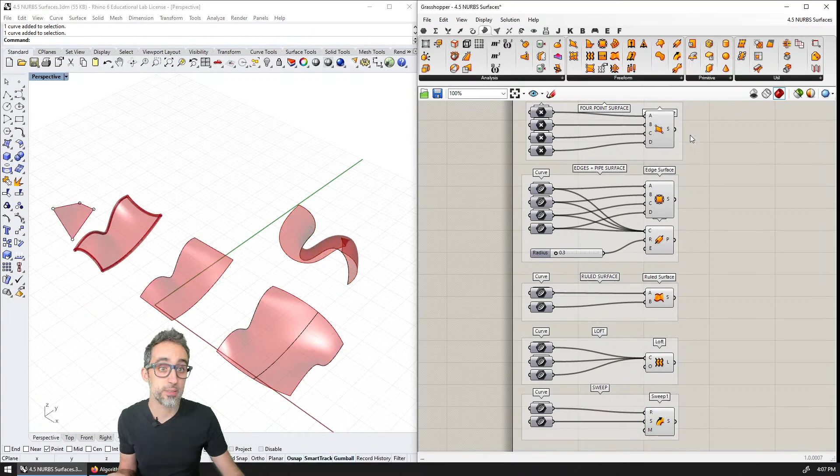How this works and the mathematics behind each of them is kind of complicated at this point, but in general, any operation for creating surfaces that you might find in Rhino probably has a mirror in terms of a Grasshopper component, and vice versa. So in order to create complex surfaces, I highly recommend that you go to freeform or primitives and explore all the operations, all the ways of creating different surfaces. This is very useful, and if you're doing freeform modeling, you will use a lot of this very often.

Okay, wonderful. So I think we're ready for some hands-on exercises in the next video. Is that what's happening? Are we getting dirty?

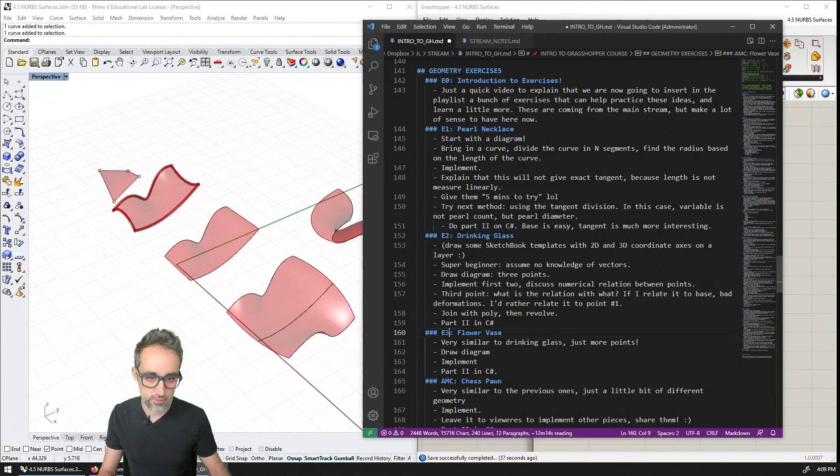All right, so that's going to be 4.5. And this is going to be E0, introduction to exercises. And this is going to be E1, pearl necklace. E2, drinking glass. E3, flower vase. I think that's the last one that we're going to do today because I'm a little tired.

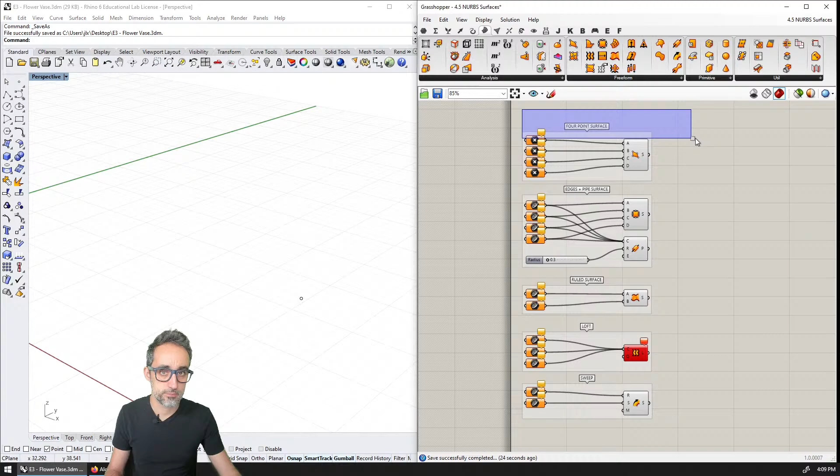Yes, we're going to save. We're going to save this here, without the bifocals. And then we're going to open the drinking glass. I'm going to remove this and save as flower vase. And here, I'm going to shut this down, and here I'm going to explain the same concept.

Okay, so I'm just going to save this and create a new one. And we're going to create a flower vase. Let me load before I do any of this. Let me open. Okay, so let's do the flower vase.

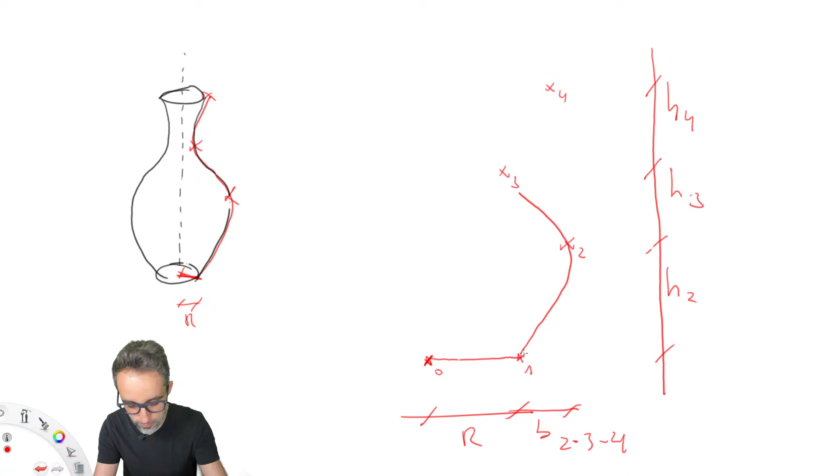And then for each one of them, I'm going to define B2, which is going to be how far off point 2 is in relation to the previous one. Then I'm going to define B3, which is how far off point 3 is from point number 2. And also B4, which is how far off point number 4 is going to be from point number 3. Then I'm going to create an interpolated curve, and then I will revolve that over an axis and generate that form.

Okay, so conceptually it's going to be almost identical to what we did before. It's just going to be a little more tedious. It's going to have more steps, but it's going to be conceptually the same thing. So shall we give it a try? Let's give it a try.

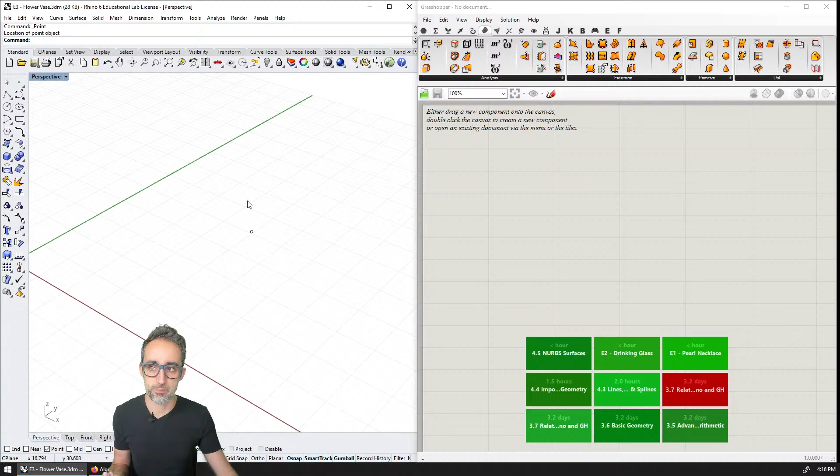We are back in Rhino and Grasshopper, and for this exercise, because it's going to be very similar to the previous one, I'm actually going to do it a little fast. So if you can't keep up, just slow down the video, or just look at what I'm doing, because I think you're going to be able to reproduce this very simply. So I created a point here, and now I double click and bring in an empty point parameter that I use to import that point into Grasshopper. And then I'm going to drop here some bifocals so that those of you who don't use icons can also follow the video.

Then I'm going to set up my parameters. That's going to be a slider that is going to be the radius, and I'm actually going to do this offline and then I'll be back. So I'm going to create the parameters that I have defined in my diagram.

Okay, so let me do that. So that's going to be radius, and that's going to be from 0 to 10. Okay, and then I'm going to copy this, and that's going to be H2, and that's going to be H3, and that's going to be H4.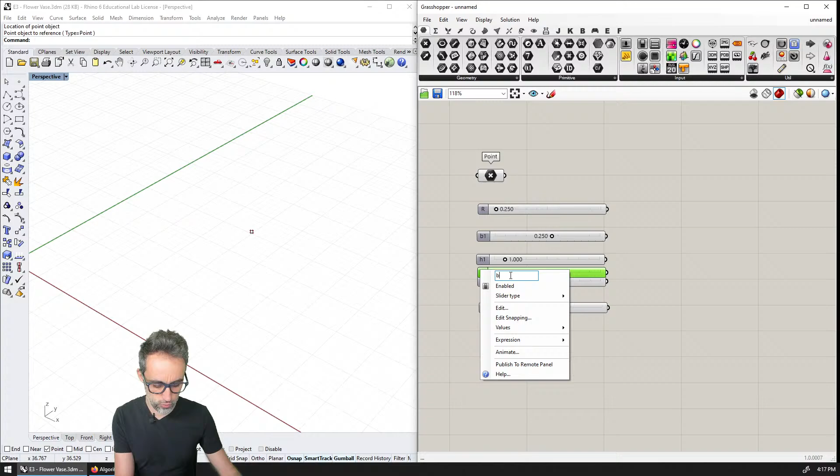And then B1. I'm going to be B1, which is going to go from -3 to +3, for example, and it's going to be 1 unit, and then this is going to be B1, B2, and B3, for example. Okay.

So here we are. So we have the point, we have the radius of the base, and then we have the increment of each one of the points, B1, B2, and B3, and we have the heights of each one of the points, height 1, height 2, and height 3. I think I actually did the numbers wrong. I think here I said B2, B3, B4, and H2 there. So you're going to forgive me about that inconsistency.

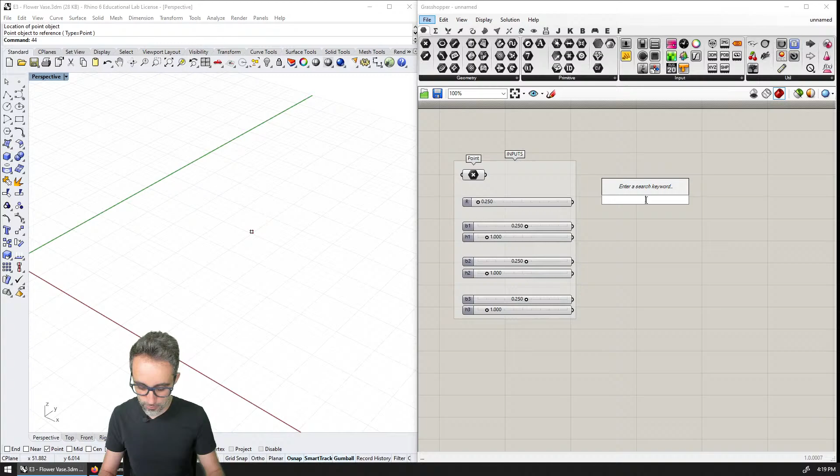But yes, so now we have this, and then remember, the first point is going to be where point 0 was, and then we're going to add the radius to the x coordinate. So I'm going to deconstruct this point, I'm going to take its coordinates, and then to these coordinates I'm going to add the radius to the x coordinate. And then I'm going to construct a new point. So that's going to be this one, and this one.

And for the radius, I'm going to open it up a little bit like this. Okie dokie. And please label everything. Okay, so that's going to be point 1. And then point 2 is going to be, again, I'm going to deconstruct the previous point. I do have the numbers here. I could plug it right away, but it's a little easier to read, I think, if we do it this way. So I'm going to deconstruct this, and as per the diagram, x needs to increase by b, and z needs to be increased by the height.

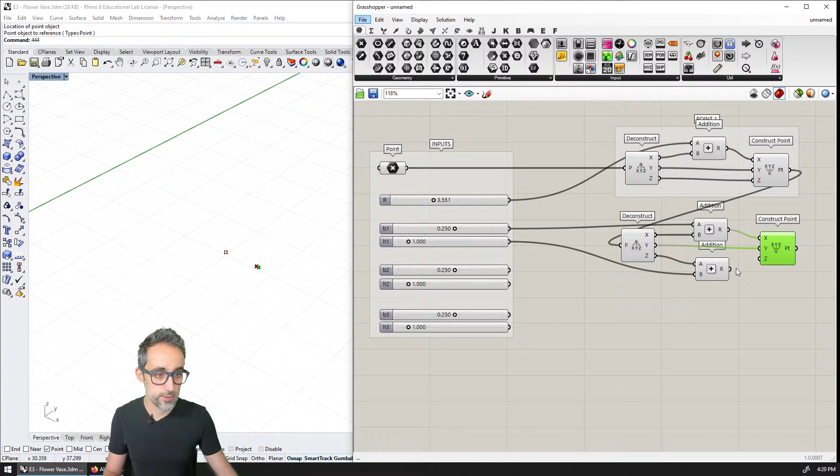So I'm going to add b1 to the x, I'm going to double click addition, and then to the z, I'm going to add the height. And then I'm going to construct a point with this coordinate, and this coordinate. Okie dokie. So that's going to be point number 2. All right. I'm going to open it up a little bit like here.

And then I'm going to copy and paste the whole thing, which is very dangerous. I highly recommend you never do this because copy pasting is the devil. It always gives errors, or it makes debugging things very difficult. So I'm just going to replug this one here. So I'm deconstructing the previous one now, and now I'm adding the new base to the X and the new height to here, and then I have the third point.

The third point, I want to bring it negative a little bit, and the height is going to be short here, and then I'm going to do the same operation. I'm going to copy and paste all of this, and this is going to be point number 4, and the point that I want to deconstruct now is this one, and the base that I need to add is B3, and the height that I need to add is H3. Okay? And then I have my 4th point there.

And then you can see that it looks like I have the profile kind of, but the radius is a little too much. Well, we can see that very soon. Okay, so what am I going to do?

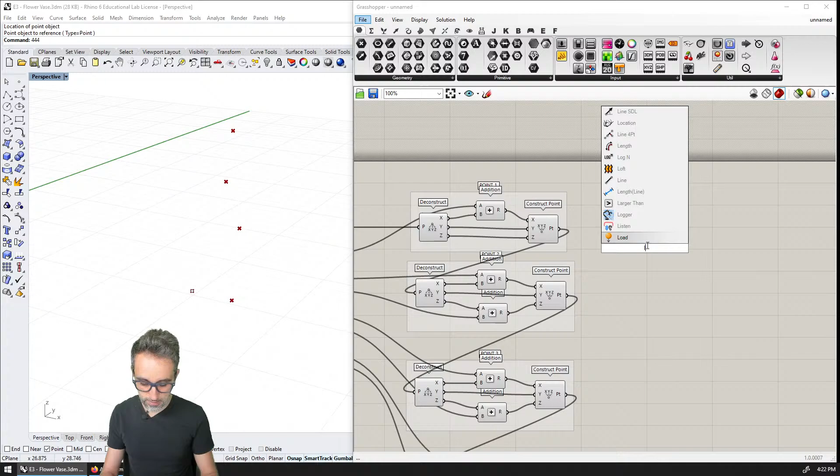First of all, because in this case, my modeling is that I have here a straight line, and here I have an interpolated curve. In this case, I cannot do both things at once because they're different kinds of geometry. So what I'm going to do is first create a simple line between point 0 and point 1. So that's going to be the line for the base. And then for the other points, I'm just going to join them with an interpolated curve.

So I'm going to go here, to curve, spline, interpolate, and I'm going to add the first point, then press shift to add the second point, press shift to add the third point, and press shift to add the 4th point. All right, and then you can see that now I have the profile, which is an interpolated curve. Awesome. So now the only thing that I need to do is the revolution, just like I had before. So I click here, I place a revolution.

The profile is going to be this one. The axis, remember that we need to generate. So I'm going to deconstruct the point here. I'm going to add to the Z coordinate. No, sorry, not this point. The one at the base here. So the one at the base, I'm going to deconstruct it. I'm going to add some number, for example, the value of 1. And this one doesn't need to be a parameter because it's just auxiliary geometry.

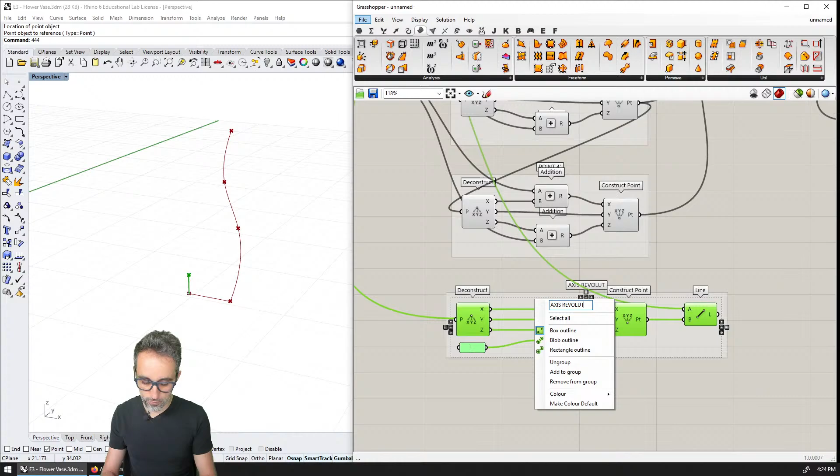I'm going to construct the point again with the same X, the same Y, and the Z that is a little higher. I'm going to create a line between those two. So that's going to be the base point and the new point that I just created. So this is going to be the axis of revolution. And then I'm going to plug this in here as the axis. All right. Wonderful. So it looks like it's working, right?

So let me do a couple tweaks. Let me find a nicer base. So for example, the radius, and then I'm just going to decrease this height a little bit. And then what am I going to do? Oh, look at this. How cool is this? Look how by affecting one, everything that comes after gets affected. And how by affecting the one in the bottom, everything also... Oh, this is pretty neat, right? I like this. Oh, sorry, my head is in the way.

But I think we could be cool with this, except for one tiny detail. If you look at the situation closely, if I bake this now and take a closer look, we can see that actually the vase is empty in the bottom. There is no base. And depending on what we're doing for rendering, this may actually not be a good thing. That is because, and I'm going to delete this, the only thing that we have revolved is the interpolated curve here on the side, which was this component here. We have not revolved the line.

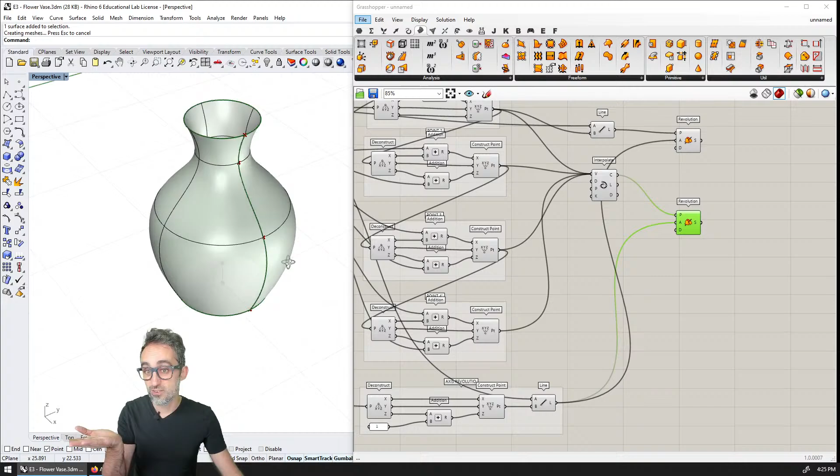Okay, so there's two things we can do. We could just copy paste the revolution component, and instead of revolving this curve, we could revolve this line. And then we would end up with a surface that is the base, you see, and then another surface that is the profile. However, this is not very clean because basically we have two different surfaces. And if we want to move things around, etc., it's just not great.

So what we can do actually is join the two curves, the straight line segment and the interpolated curve, into one single curve that has these two segments. The way we can do that is by joining curves. I forget where that is; here in utilities. If you click here, you can see that you have join curves. So I can place this component and then join the line with the interpolated curve. What that gives me is a planar curve that I can now plug into the revolution.

And you can see how this turned darker. That's because now this is also a surface. And if I bake my vase, you can see that the whole thing now has a top that is open and a bottom that is closed. All right. Okay, so this is going to be the surface. And then should we have some fun and create some? All right, so let me go here and now create what?

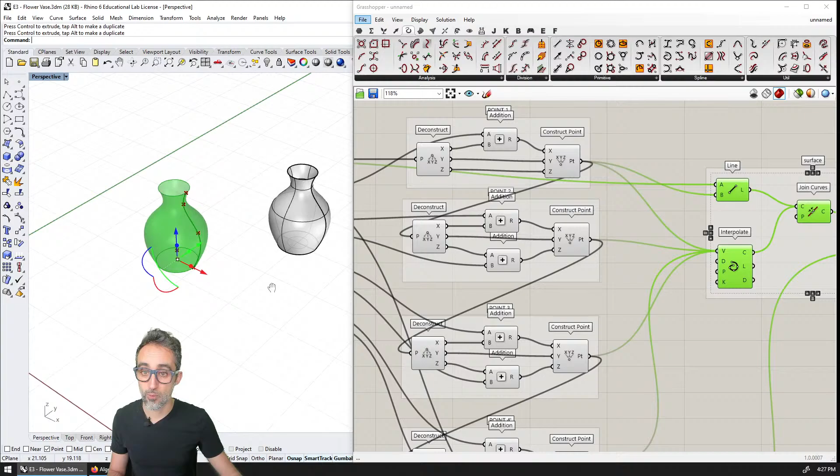I'm going to create one that is a bit more slender. I'm going to switch it up. Look what's happening here, I'm getting this flute effect. I'm going to make this really elegant shape, super slim, with a super thin opening on the other one. I like that, it's kind of nice.

I'm going to bake this, and maybe I can do a third one that's a bit shorter and more open wide. I'm going to reduce the height here. Maybe this is a little too much, maybe I want something like this. That's kind of cool actually, I'm going to keep that one.

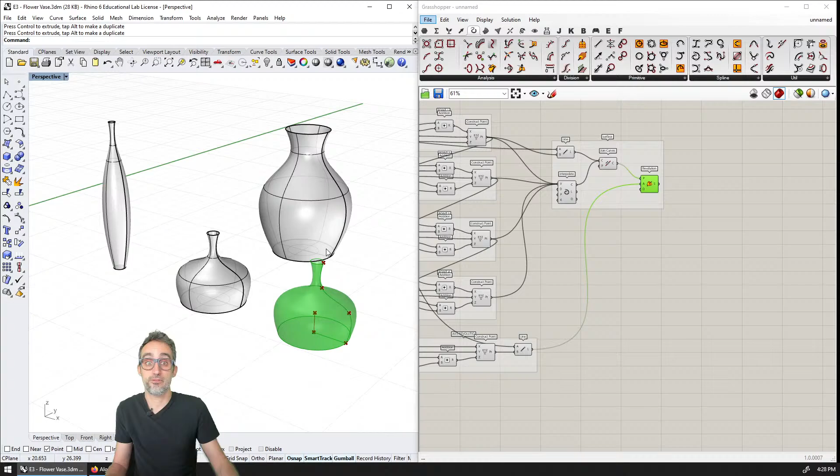And then I'm just going to move this all the way out here. Alright, so this was the generation of an algorithm.

Remember, we are designing parametric algorithms. This was the generation of an algorithm to create parametric vases for flowers, for example. And with that, we have created the tree of relationships, which is starting to look like a spaghetti of trees, but nonetheless it works, and it allows us to explore formally the generation of these vases, which I think is kind of nice. So this was an exercise to try parametric flower vases.

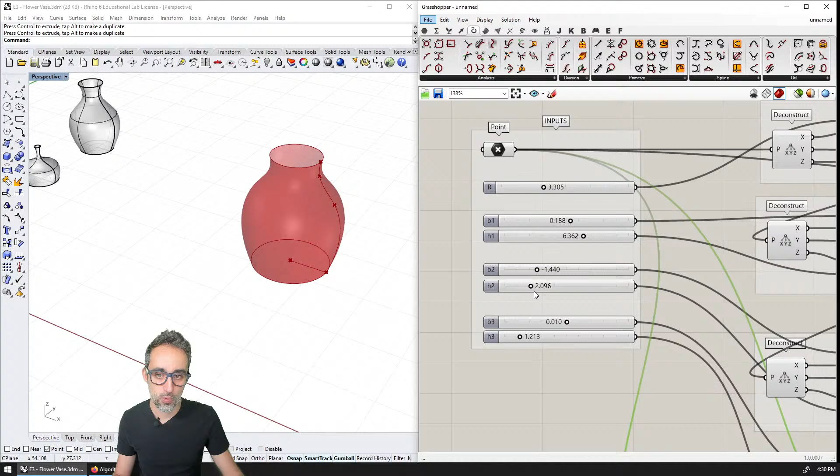Alright, and we need to record the intro video. Okay, so that's going to be... okay, so that's going to be... Okay, so I'm going to move this here. Alright, so, and this is going to be exercise 3. Wonderful. So...

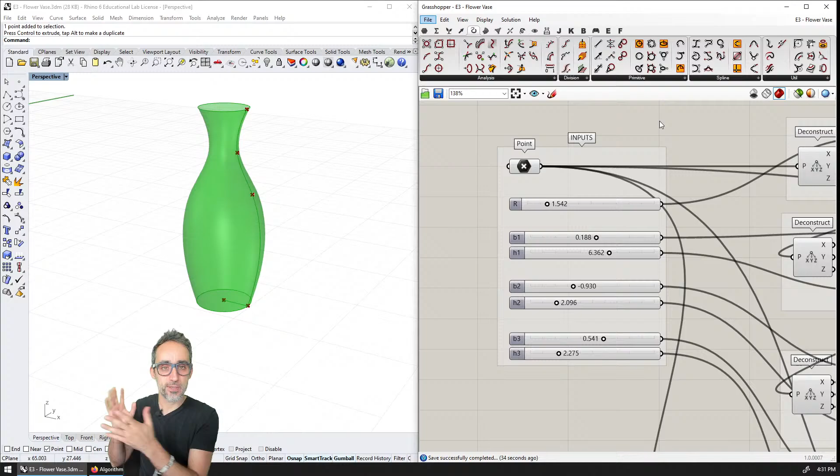Hello, this is Jose Luis, and welcome to this new exercise video in the series Introduction to Parametric Modeling, where I'm going to extend on what we did in the previous video with the drinking glass, and it's going to be a very similar example. Technically it's just going to be a little more complicated because it's going to involve designing the shape of a flower vase, and this is going to involve working a bit more with the curvature of the surface, but the technique of relating points to each other is going to be pretty much the exact same thing.

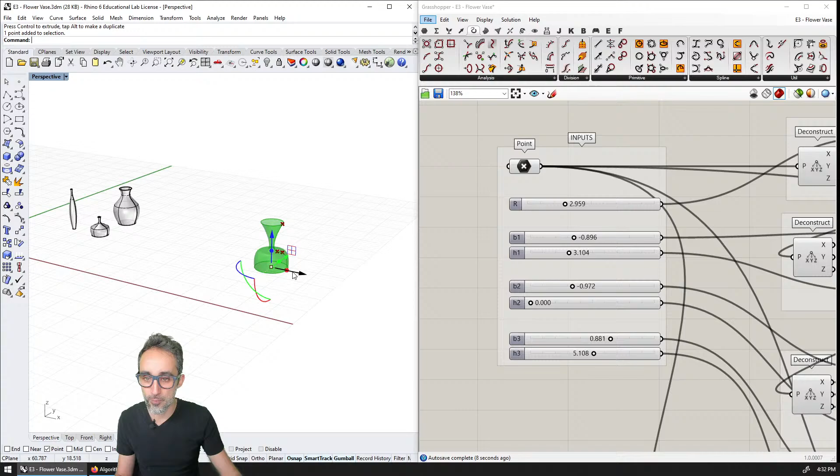So I'm going to still have the option of moving this at any point in x, y in the world coordinate system, and then I'll be able to play with the radius of the base and with the radius of other parts of the vase, and then play with the curvature and how this looks in 3D space. It's going to be super interesting, and it's going to allow me to create formal families of different parametric vases. So if you're interested, give it a try and check out this video. Otherwise it's going to be very similar to the drinking glass, so you may want to just skip to the next video if you think you know what we're doing. Okay, alright, let's get hands-on.

Okie dokie. Alright, so I think with this I am calling it a day today. It's been a lot of recording. Oh, my ears hurt, ow. Do you folks have any questions, concerns, things you want to share, etc.? I may have a couple of minutes to hang out and chill with you.

Saeed, thanks to you, have a good day man. I'm going to start shutting things down here. And, what else? Nylan, thanks to you sir, I'm very happy that you're here. I'm not sure if I've seen you before on the channel, but if you haven't, just join the Discord and introduce yourself and let us know who you are and why you're here and all those kind of wonderful things. Saeed, I know it's almost night here as well. Alright, so I think this is it. Alright, it was a pleasure. Thanks everyone, I'll see you tomorrow. Remember, we're doing this all week long, so until we finish parametric modeling, we're doing this. This week it's happening, parametric modeling, Grasshopper, done. We're moving on to other things. Okay, alright, have a good one, thank you, bye.